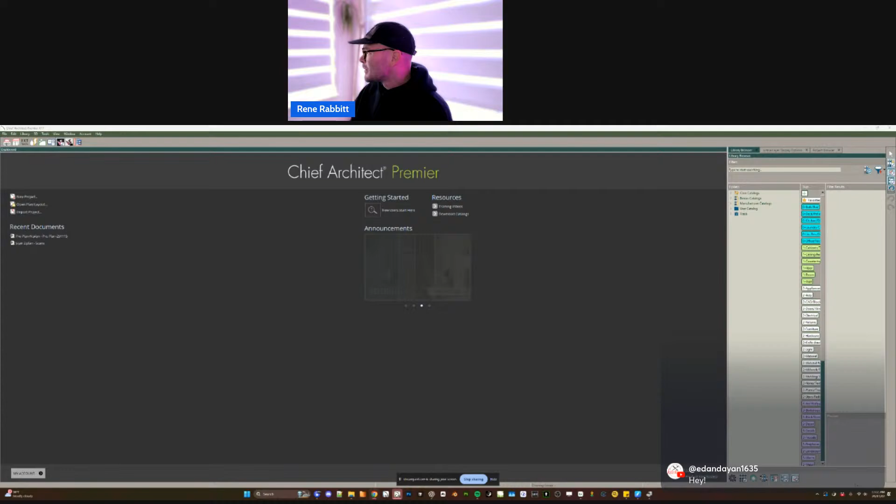Cool, so what can I go over? I'm thinking the first thing that I'll go over is something that I was going to keep and reserve for my membership, my paywall on YouTube, but why not? I don't have anything else to talk about, so let's show you something cool that I would usually reserve for a special audience. So I'm going to get in and just start a little template here.

I'm going to show you something. My templates, the way I build them out - this is, I guess, sort of a shameless plug - but the way I build out my templates, one of the really impactful things you can do in X17 is you can make it so that your plan file, a base plan file, is already being sent to a bunch of different sheet sizes automatically, so that when you start drawing, those different layouts are being populated.

So you can have different layouts for different builders, if you will. You can have different layouts for different scopes if you want to. And it may seem a little bit complex, but all you would need to do to get there is build out a project. And then when you're done with that project, I want you to gut that project. And then you can figure out how to save this as what I would call a template project, keeping in mind that it's not technically a template.

We will never be going to a file menu to access this. We would just be going to our project browser and then copying a project that's already built out, where we have a plan file being sent to multiple different layouts. Now that's in a very advanced realm of figuring that out, but I just wanted to lead you down that path because I just had a training call where a gentleman was discussing, how can I automate?

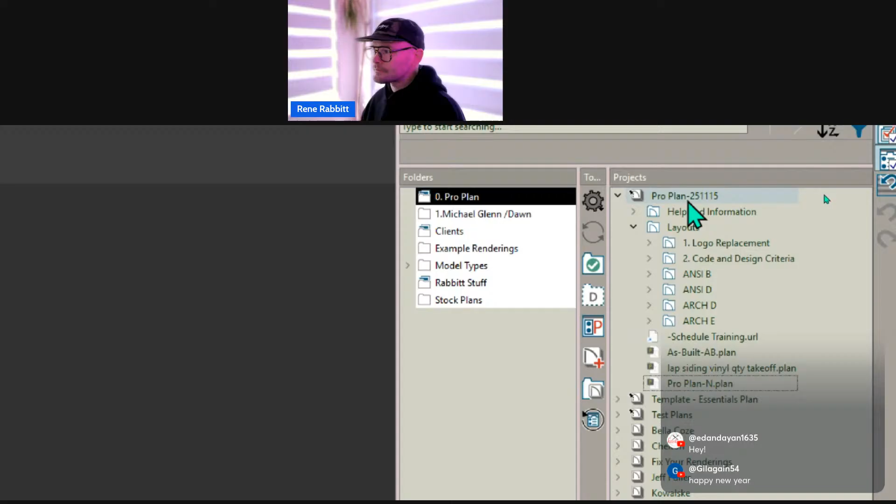Instead of using one layout and a bunch of different complex default sets that you have to flip for every view, he could have just been creating additional cameras, allocated on different layers, and then being sent to different layouts.

This is kind of an example of what I've got going here. I'm going to make a copy of my base template plan because I want to mess around here. What I want to go over today is showing you how to create a parapet builder pretty quickly, so we get a one-click action to create a parapet that might even give us the correct details if we were to pull a cross-section camera. I want to show you how to do that.

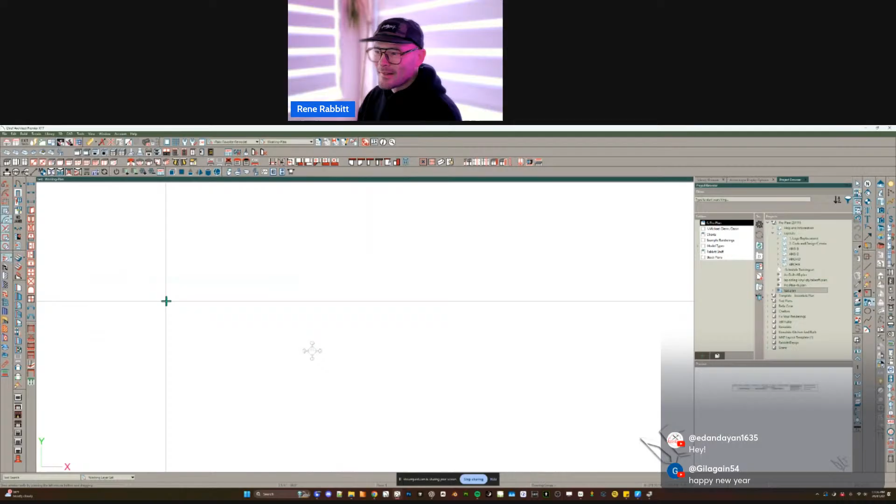I'm just going to start with a really simple four-wall room here. If you're on a Windows machine, I always like to mention this - I think it's such a huge tip - I'm going to use what are called mnemonic keys, and I'll take a second to explain what those are. Unfortunately we don't have this on Mac, and we've never been able to create a workaround on Mac, not to the extent that it works on a PC.

Mnemonic keys are when I tap my Alt key - I want you to see my cursor up here, you see the top menu items. When I tap my Alt key, just tap it, don't move your mouse anymore, hands off your mouse. When you have your hands off your mouse, you tap your Alt key. Notice that all the menu items on a PC are underlined here, with single letter underlined words.

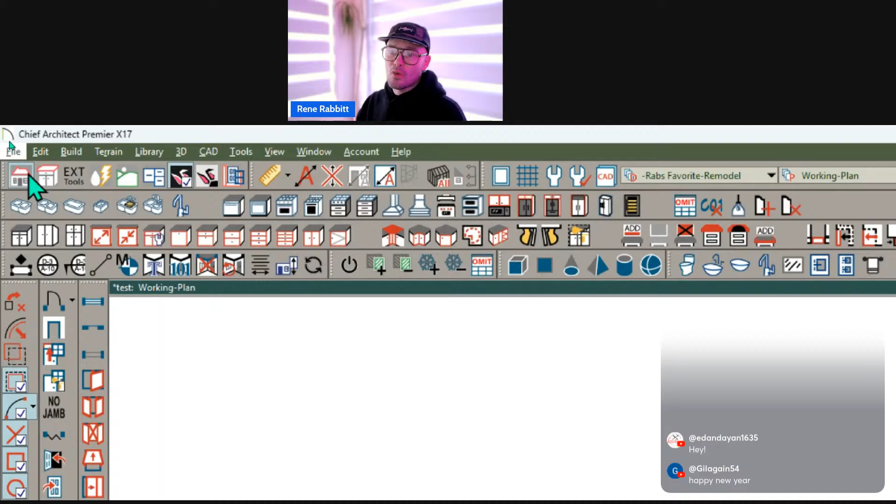So if I want to build a second floor very, very quickly without ever even touching my mouse, I could go Alt B for build, O for floor, and I could just hit enter right now, or I could hit N for build new floor. I'm just going to hit enter, and then if I hit enter twice more, it's just going to copy basically the same configuration from one floor to the next, and now I have a second floor. Isn't that cool?

So the next thing, what do we do here? We want to basically set this room up so that it's got no roof over this room, right? So you can come in here in the structure, say that it's no roof over this room, and we'll press OK.

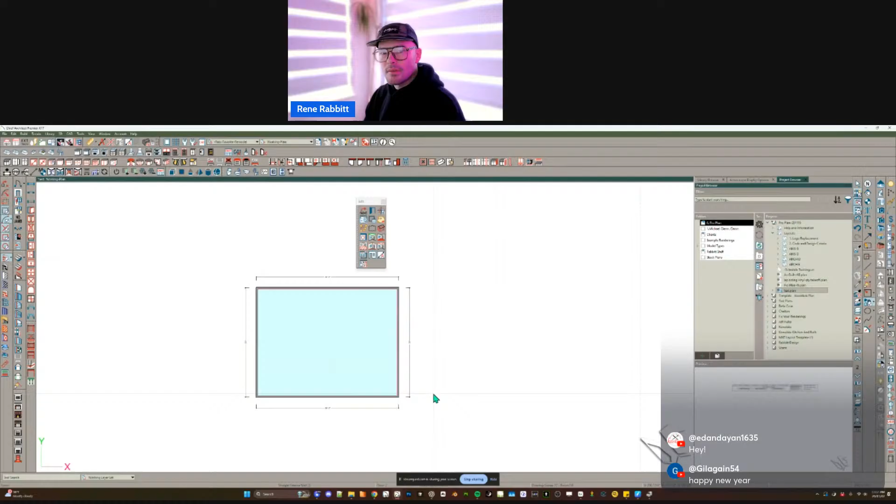And then the next part of this is just setting up these walls. Now I'm going to cheat a little bit - I already have a tool that builds a parapet. I just want to show you how simple this is.

Let me go ahead and pull a perspective overview here, and I'm going to get into my library. But I want to recreate this, and I'm going to probably do a better job this time around. Here we go - I've got a little parapet built here.

So if I just spray this room, look what happens. A couple things happen that might be interesting. One is we've got a cap, and two is that we've got some kind of cant in the base here. And three, you can see that there's some new texture being applied to all the walls and the floor.

This is what's called a style palette, all right? And it's a room style palette. So it's saving some configurations about the room, and then it's applying that as a single click action so that I get to just target a room. We could do this in 3D or we could do this in 2D.

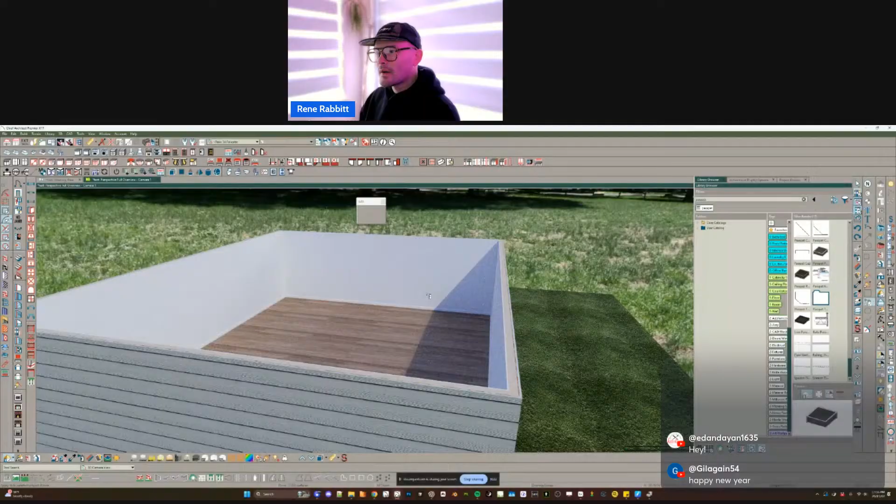The same effect would happen if I just back out one - we can see the previous room, no cap, no wall cap, etc. Now if I go here and I'm on the second floor and I've got that tool active, you can see this is our scope tools right here in our edit menu. My edit menu is floating in the screen. I just get to hover over this - that's my highlight color right there. Hover over this, click, and you're going to see this updates. So it works either in a 2D plan view or it works in a 3D view as well.

So the next thing is I want to make this a little bit more detailed and save this back as a new style palette. What I'm going to do is pull a cross section, backclipped cross section, just so we can see what this is looking like currently. And then I have a parapet detail here that I could work off of.

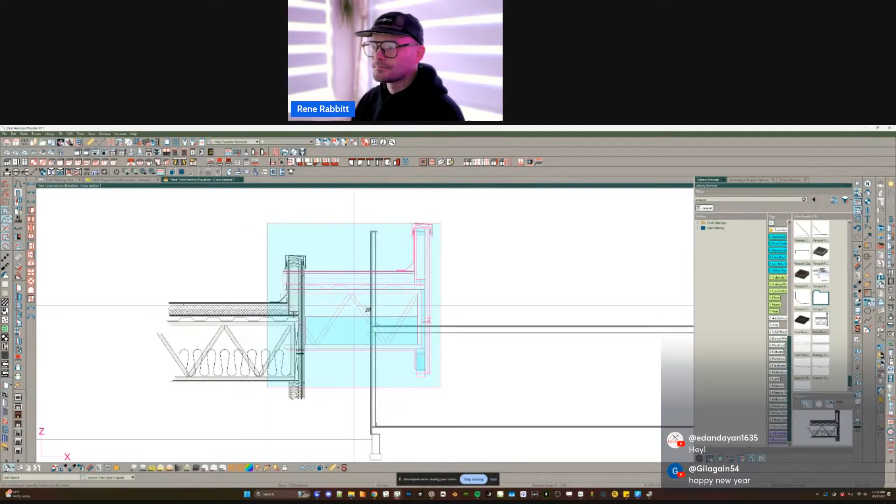Maybe I'll recreate this from these different moldings here, so we can see what was happening. There's just one simple molding in here. We want to make this a little bit more complex. I might even create all of these different moldings and apply them in that style palette tool, and I think we could do that pretty quickly for the most part.

Now, I'm not sure how interesting it is to see me draw all these individually, but given that this is just a CAD block detail, I'm going to make sure that all these are set to a default layer. If you didn't know this, when I unblock, everything in that block is currently selected, so I could conform the layer just by changing it. This minus sign indicates that some of the selected layers are default and some are not. If I click this once, it puts a check mark there, setting it to that CAD default layer, so now I know I'm displaying that in my current layer set.

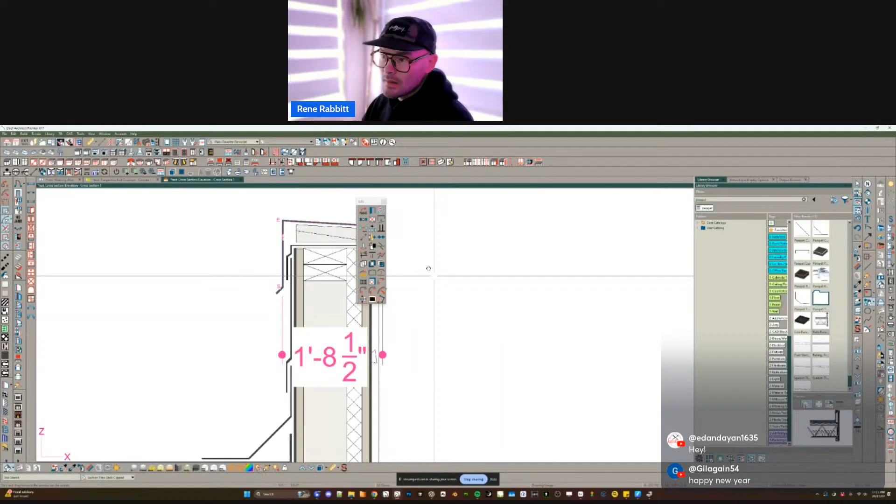Next up, it looks like I already have these moldings created. Now the scale of this is wrong, so I might want to mess around with the scale to try to get it to a uniform scale. I do believe I started drawing this, and I think it might be more interesting for you if I don't sit here and watch me draw a bunch of moldings, but instead power through it and explain the overall goal here.

Let me see here. I think I have a series of moldings in something I called to sort. Let's see if we can find it real quick.

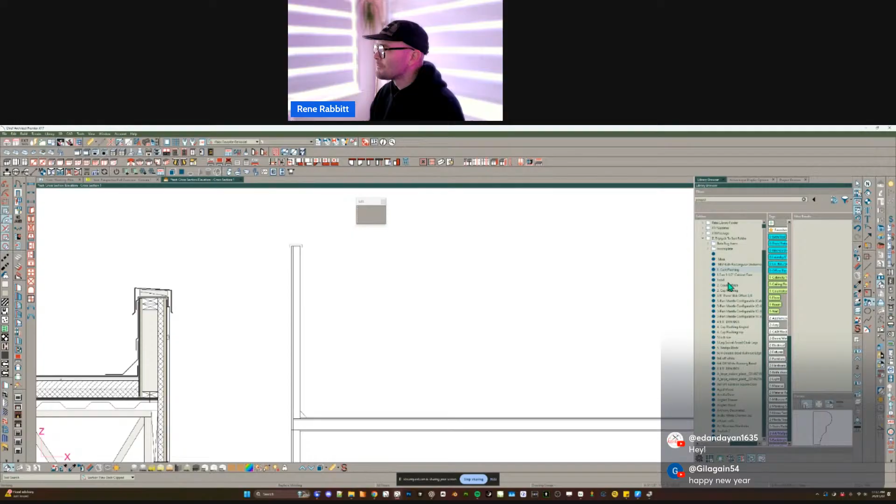So here's what I'm going to do. I have these moldings in my catalog. This would have been a lot easier if I just typed in 'mold.' Let's see what I'm typing here. Molding, and you can limit your search to a specific type.

If you come down here and see this icon, it's saying, hey, I only want to see moldings. Then I can go find my sort section here, and we can see that I started drawing these. I was just prepping for a video I was going to do about this.

Someone said the audio is great.

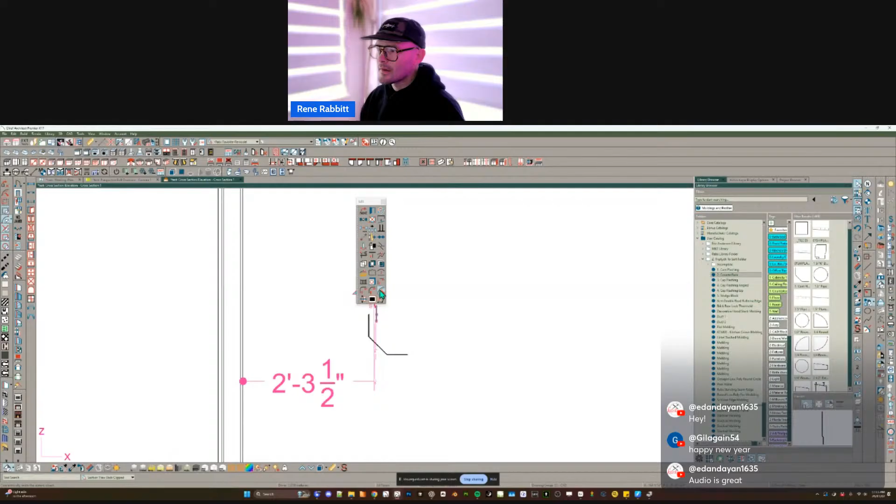Now, if you didn't know this, you can always modify a molding profile by right-clicking in your library and saying place molding profile. This will place this as a CAD block, so we can see what's happening. So there's a cant flashing. I'm going to do the same thing with this counter flash just to see what this is looking like. We can see this is going to line kind of like this.

Sure, right, here's our cap flashing, that's going to go at the top. Again, if I didn't select place molding, it thinks I'm just trying to draw a molding right now. It would draw a molding line if there was a snappable point it could work from, which is a little more difficult in a cross-section view.

And so here we go, place molding profile. Just click and place, cap flashing angle. Let's place that molding profile. This one goes over the top of the first one.

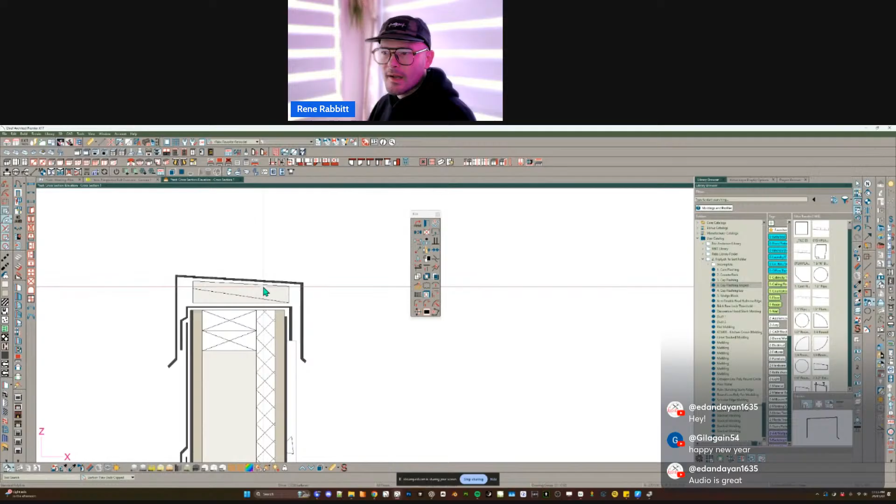Now here's the real big trick I was going to implement for this particular detail. There's no way to get a 2x4 that's been chamfered like this, cut down like this and angled like this. So I thought maybe it would be interesting if I made my own molding profile to just look like that 2x4, because the only time we're going to see it is in a cross-section view.

So what happens if I just drew this out? Let's see how I drew this real quick. That's simple enough—this is a disconnected molding profile.

You see there's a little gap here, which doesn't bother me all that much. Once we turn line weights on, that just looks like a cut down 2x4. So that works pretty well.

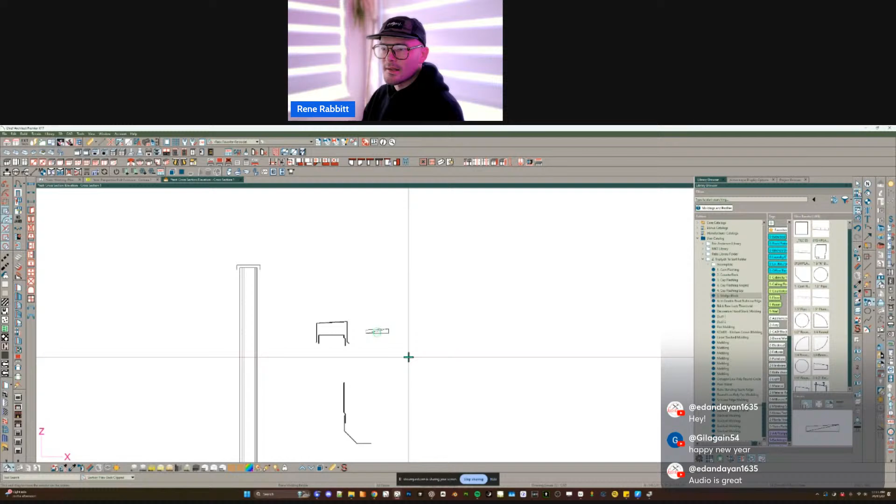So it looks like I have all these drawn. What's the next step? Now we got to figure out how we can align all this. There's some complications and some tricks to this that can be a little bit challenging. So let me get into this room specification.

I'm going to select the room, open it up, and get into the moldings section here. We can see we've got some moldings in here that we're going to replace. I'm doing this on the fly, this is not practice, so I'm going to screw up a little bit probably.

All right, so now I can get into where I've got these flashings. Should be easy enough to just start by just loading these in, I would say. And it's going to pick up, it's automatically understood that was some kind of base molding.

It's not going to understand that this is a base molding. It thinks it's a crown molding. That's okay, we're just going to set this to base molding. You just do that in the type section.

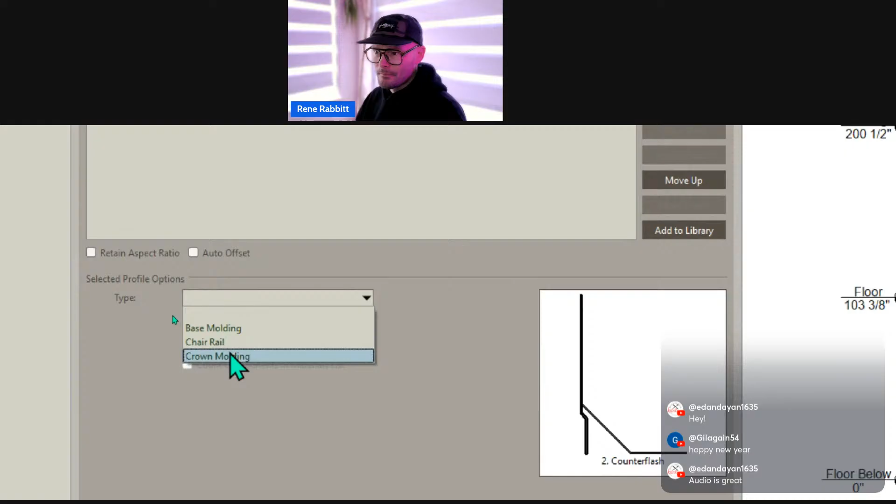I want you to notice this, base molding, okay? If we just left it blank, who knows? If you set it to crown, what happens?

When we set it to crown, it's going to place a check mark in here to top, all right? And so when we get a preview of this, we're going to see that, here we go. This is how it's placing, to top. If we unchecked to top, look what happens. It's referencing the bottom, okay? It's still being designated as a crown molding, but it changes kind of its origin point, all right?

So this one actually is going to be a base molding, and then we're going to change some offset. Now, another thing happens when you change the type classification. I want you to see this.

Notice our preview, it's just showing this molding. That's because no other moldings are classified as crown right now, okay? Now, if I were to change this back to base molding, notice something. We see our cant flashing here. Why is that? These are both classified as base moldings. So this is a way that you can see how these are interacting with one another, all right?

And so then if I change some kind of vertical offset for this, let's just say I'm doing a vertical offset of maybe about 6 inches or something. I didn't take any dimensions here, but look at that. Now we can see how this is working together.

Pretty cool, all right. Now, this is not going to be a perfect flashing setup for one very specific reason. We aren't using what are called 3D moldings, okay? We're not using a molding profile that was generated from a 3D symbol. There is a benefit to doing that for this particular molding.

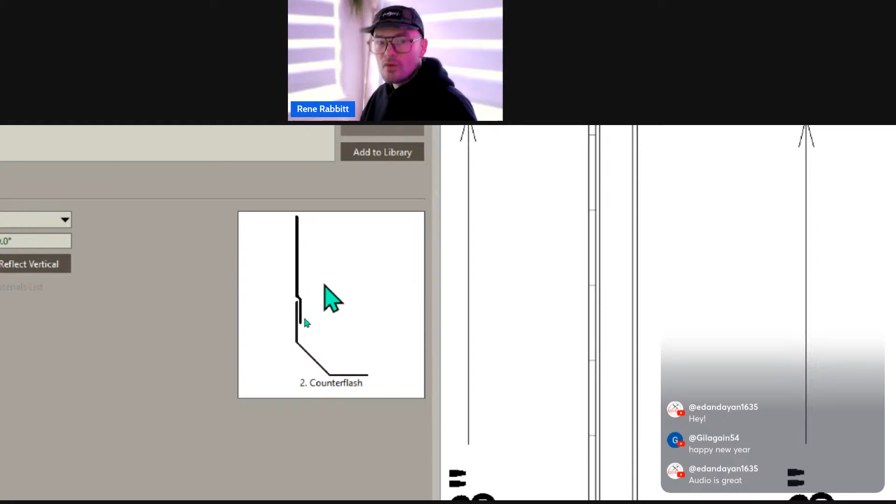When you draw a 2D CAD symbol and convert that to a molding, it cannot be stretched in any axis, separate from just being uniformly stretched just by resizing it, okay? So we can't make this upper portion here be taller without it just being skewed in every which direction uniformly, okay?

If instead I were to have converted this to a solid that was maybe 12 inches long, and then from there converted it to a molding, then I get the option to put in a stretch plane. And if we know about symbols and how stretch planes work, we know that we could put a stretch plane 4 inches up in the Z here.

And what that would do is it would create a uniform cutting plane so that if we resize the symbol's height, it would stretch by just duplicating the geometry around where that stretch plane created a cut line, okay? And so that would make it so that we could change the height of this based on the height of our parapet wall. Very cool. Maybe if we've got some time, I could show how that all works.

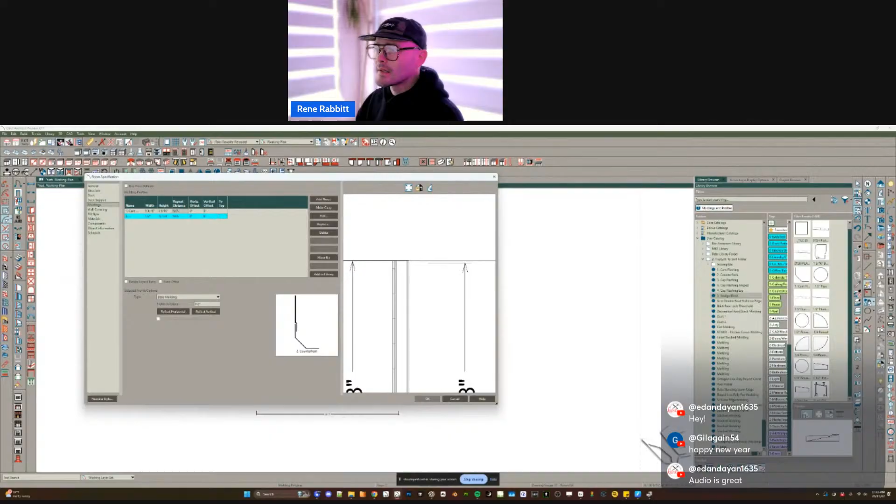All right, so let's get into that next molding here. And notice I numbered them. That was just to make it very easy for me to go through here one by one and just put these in place. You can obviously rename them after the fact, and that would be just fine.

So here's my cap flashing. Let me put this in. And so this one is going to be crowned, so I'm going to leave that the way it is right now. We are going to need some kind of a negative offset, right? But I'm going to leave this for right now, and we'll get to why in just a minute.

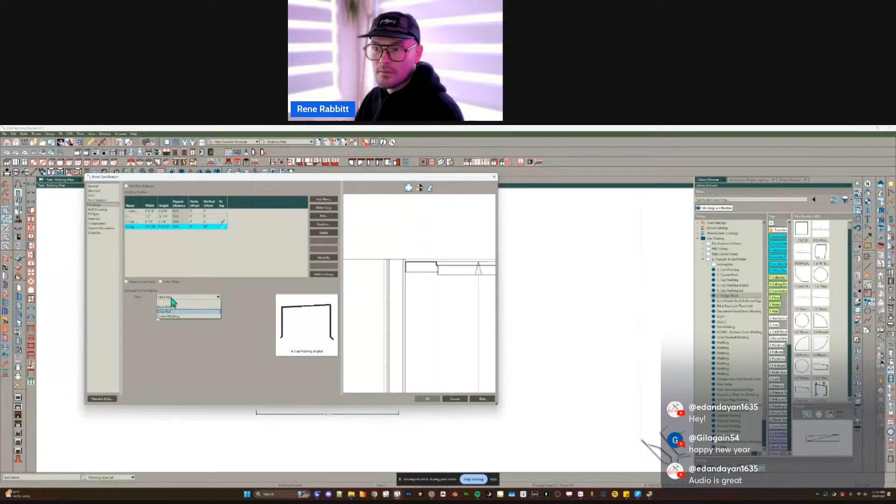Let me go to the next one, just loading these up, and I'm going to use the angle. Notice I have one that's straight and one that's angled, so I'm going to use the one that's angled. And this thinks it's a chair rail because we've already got a crown molding.

I want to make sure it's set to crown mold. Now we can see how it's orienting itself compared to that other cap flashing there. And last, definitely not least, my wedge block is also going to be a crown molding.

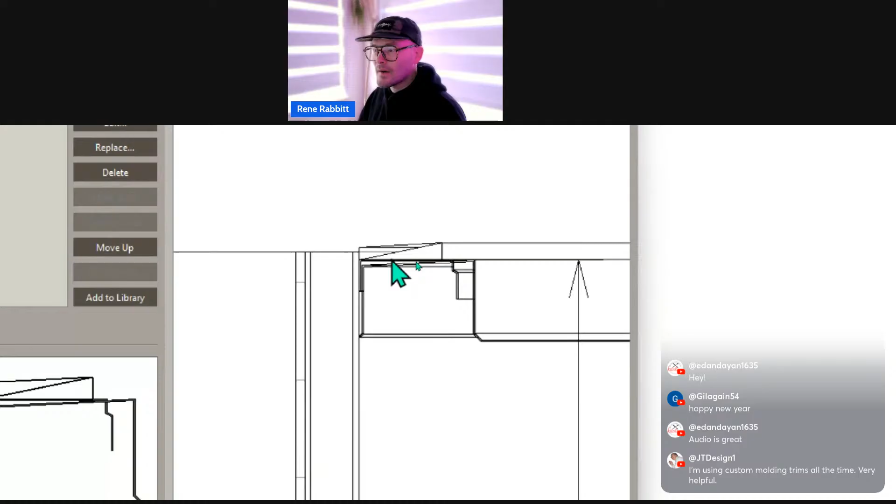Now, how do we get these caps up above my wall assembly, right, where they need to be, in particular that wedge block? So I can set this—I unchecked that 'to top' setting, and we can see that moved and changed its reference point, all right? But I still need this to go up a little ways because it needs to sit up above my wall here.

Right now it's sitting just below my wall. It needs to be up above, especially if I want that cross-section cut to be perfect. So here's what I want to do.

I want to create a vertical offset, right? So I'm going to say, hey, I want this 3 inches vertical offset. Well, look at this—Chief Architect decided at some point that they're going to flip what the offset is based on, depending on what we're working with.

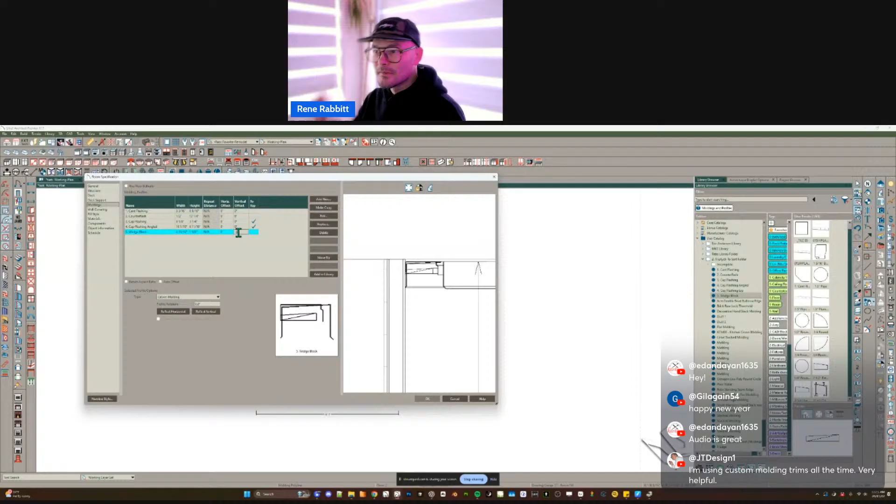I still find this to be very, very confusing. It's not quite intuitive. I would love it if Chief changed it so that no matter what, positive is in one direction, negative is in another. So we just have to keep in mind that when we're doing something considered a crown molding and you put a positive vertical offset, that actually moves in the negative Z delta.

So if I want to go positive Z delta, I put -3. I want you to notice something: it moved up here in our preview, but it did not move up here in our preview in the room. That's very important to note. Why is that? Well, according to Chief, we can't move any given molding profile past the ceiling plane height—it won't move above that ceiling plane height, and it's based on the total molding size.

But there is a trick about this—we can make this work. So all I want to do is concentrate on this preview right here; this is what's important to me, okay? You'll see how this works out in just a second.

So I'm going to go -1, actually. And then I just want this to go just above this cap molding. That's what's important right now, okay?

I keep losing my mouse because—there we go—I'm zooming. So let's just go negative maybe half an inch. And this is just going to be a guess and check—quarter inch. That looks pretty good for me for what I want if I pull a cross-section camera and I'm looking at details, ignoring this other one.

In fact, we could put a big offset for that angled cap flashing just so we can see it. There we go—so here's what's happening so far, right?

Now that top cap flashing needs some kind of horizontal offset, just a little bit here. So let's go -1 for there as well. That's looking a little bit better. And then maybe 2—that looks pretty dang good. Maybe I want the spacing to be a little bit more perfect here, right?

You'll be playing around with these distances, certainly. Or, you could bring up a CAD detail and dimension it all out so that you have some kind of reference. That probably would have been a smart thing for me to do.

So let's see, my horizontal offset—I'm going to go -7/8 instead. I'm going to center that up a little bit more, and I'm going to go -2 and 1/8. Oops, yeah, that worked out. So this looks pretty good.

Now, it looks terrible over here in our preview, and that's true. If we were to take a look at this in 3D, this is what it would look like—not this, okay? But the trick is this.

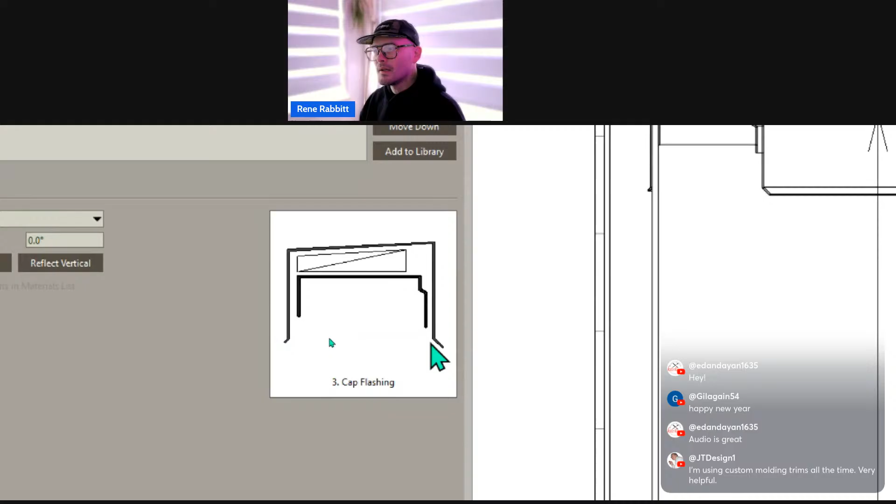Because we have this really tall profile, and we know we can reference to top, or uncheck 'to top,' that means we can offset this based on the bottom of this profile. Meaning this whole assembly, if we were to make it a stacked molding, would reference based on the stacked molding's overall height, which then means we can shift this whole thing because we've got this larger profile. Let me show you how this works.

We're going to see what happens in the preview once this all pans out. Okay, so the one thing I kind of screwed up on here is this cap flashing. Both of these, I should just reference to top. It's going to make it easier for me to assemble this whole thing, I think. Let's try it without.

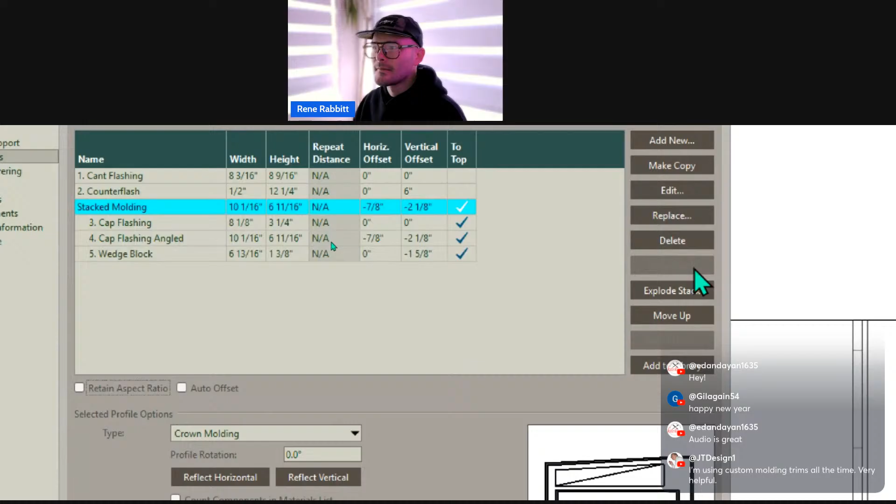Let's try it with. So I'm going to shift select all of these moldings. Select the first one, shift select the last one, right? So shift select all of these. And over on the right-hand side, I get this make stack option. So we can see what happened here. Now we've got this stacked molding, and we've got those different moldings associated with it in that stack.

Now check out what we get to do based on this stack. I want to uncheck to top on the stacked molding, I'm not going to mess with any of these settings if I did this right. So uncheck to top here. It did some kind of adjustment. Now I get to move the entire stack as a whole. Notice we got that wedge up above our wall line, which is perfect. That's exactly what we wanted, okay?

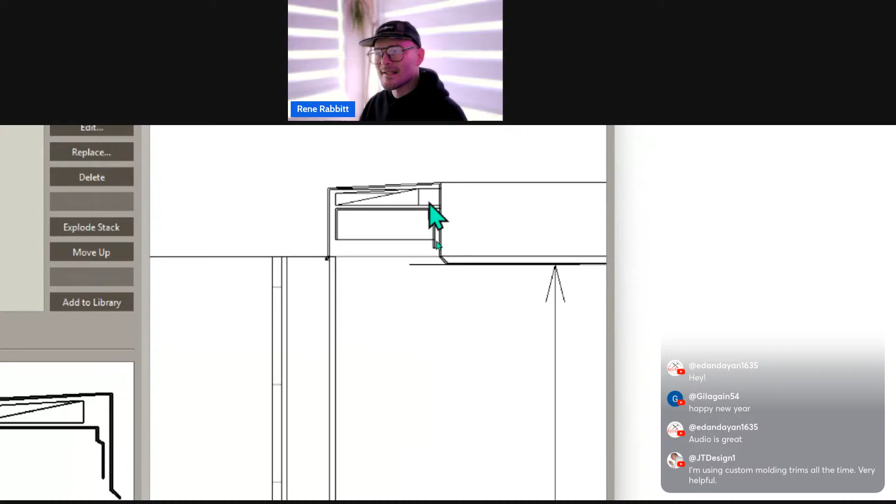Now we're kind of seeing a mitered end here, which is why we see a little bit of a return there. That makes sense because the wall is not blocking this section because we haven't changed our vertical offset yet, okay? I think that's pretty cool how they do that.

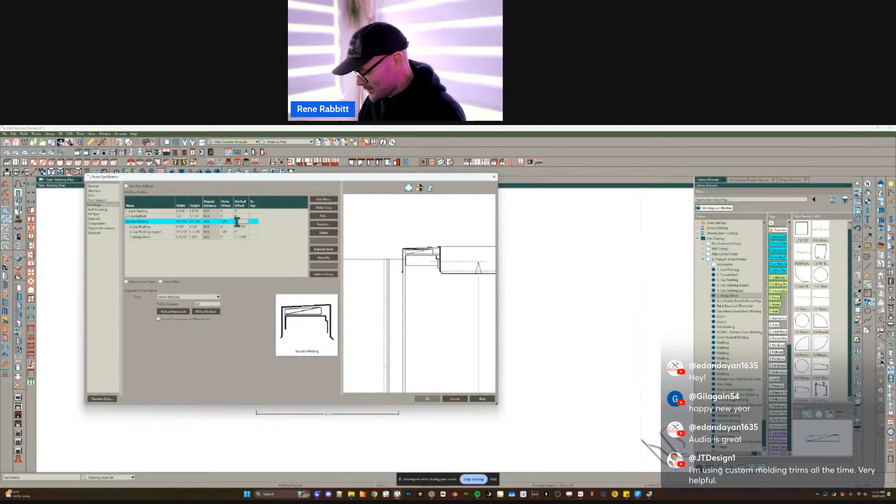All right, now let's mess around with our vertical offset. Let's set this back to a base level 0, all right? I'm looking at the preview here. Let's see what happens. Yeah, so I want to drop this down. So I'm putting in a positive value to go a negative direction. See how that gets confusing, right? Let's go bug our developers about that one.

So I'm just doing a little guess and check here. 3.5 inches looks about right. And then I've got to do some kind of negative offset in the X, so we're going to go something like -6, maybe -7. And I probably want to change this, obviously these moldings were set up for a different wall type, a thicker wall type. So I'm going to keep messing around with this offset, assuming we've got a thicker wall type. There we go, and that's about as good of a preview as I can put together there.

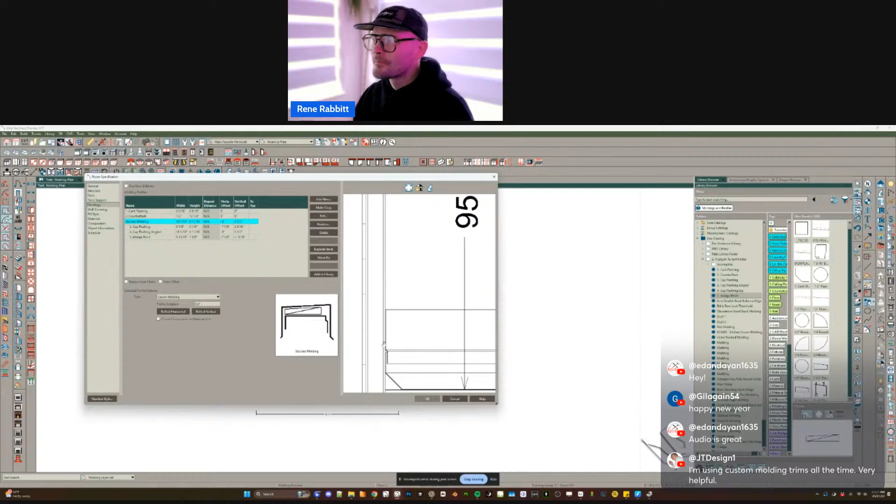All right, so if we take a look at this, we've got that cant wedge right here. I could have put some additional flashing to kind of lap over at the bottom here if we wanted to. Up to you. Yeah, this is looking pretty good. Let me press OK and see where we're at.

Let's go take a little look at this. Isn't that cool? So there's our cant, and there's that little stepped flashing that goes over the top of it. Here's our wedge at the top, right? And we can see inside here. Let's go take a look at our cross-section view now. Look at that, isn't that cool?

So when we pull this cross-section view, we do a little build all framing, we do a little auto detail, and throw some CAD stuff on top. That looks pretty dang sharp for the most part. You would do a lot less detailing, especially if I had the correct wall type in here.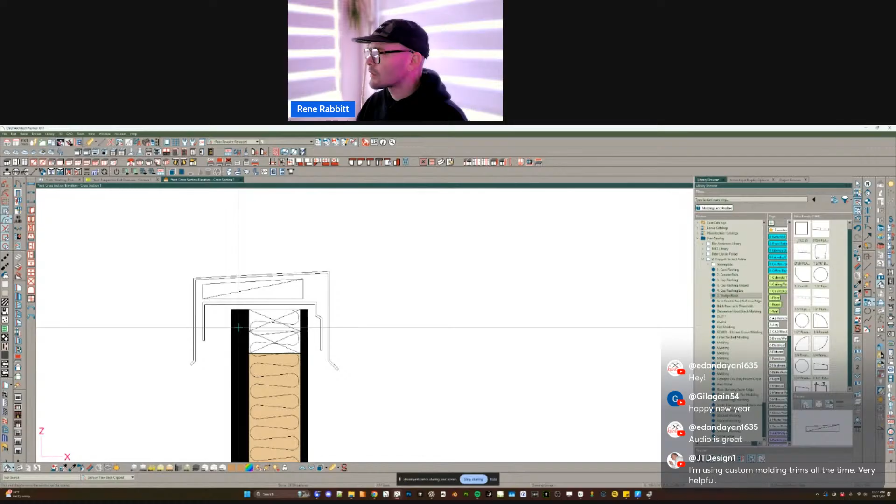So what's our next step? Well, we want to get in here and get the materials that we want built out, right? Now I'm going to build a second building here off to the right, and this is just because I want to steal a particular material that I don't know where it is in my library. Bear with me.

And let me pause for a second. Let's see what we got going on with the comments. I'm using custom molding trims all the time - very helpful. Okay, yeah, I think we might have enough time to go over what I was referring to when I was talking about creating a 3D molding.

All right, and then let's see, my parapet painter that's got a really cool texture on it here. Better texture than this one is one I created. You guys probably know by now I make my own textures. This was just created from some kind of pebble that was scaled down, so it's got a really good 3D look. Notice this is another example of a parapet wall.

Now this is one that I need to fix because you can see here I'm using a 3D molding as the cap and it's not mitering correctly at the corners. So that means you have to go manually place some things. But very cool, notice I just one click and it applied all these effects. So I'm going to go ahead and paint in this room. In fact, we'll just change it to a room scope.

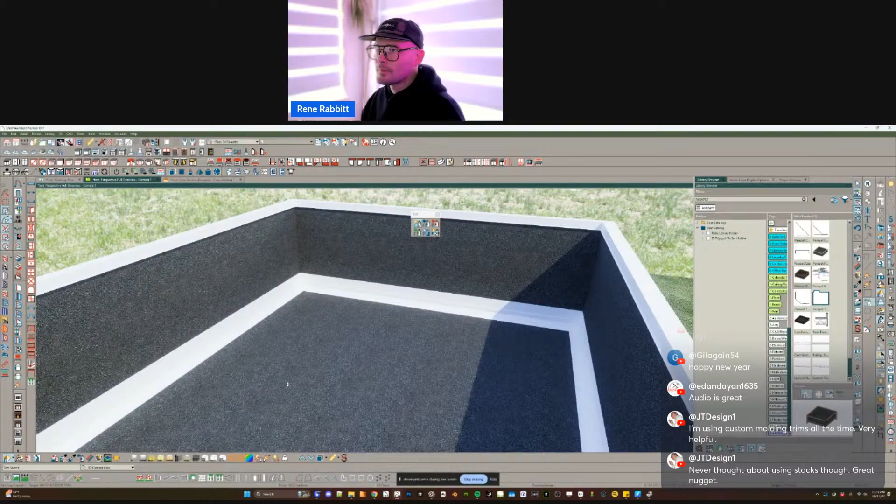And same thing, I'm going to paint my base molding here, that little wedge flashing. Although I might be incorrect, this would look a little different than this. We might actually have, oh no, that's all right, they would be rolling the asphalt over the top of that. And maybe it would have been nice to kind of take the hard edges out of that flashing that overlaps our cant. And then I've got just like a black stainless steel material that I would use for everything else.

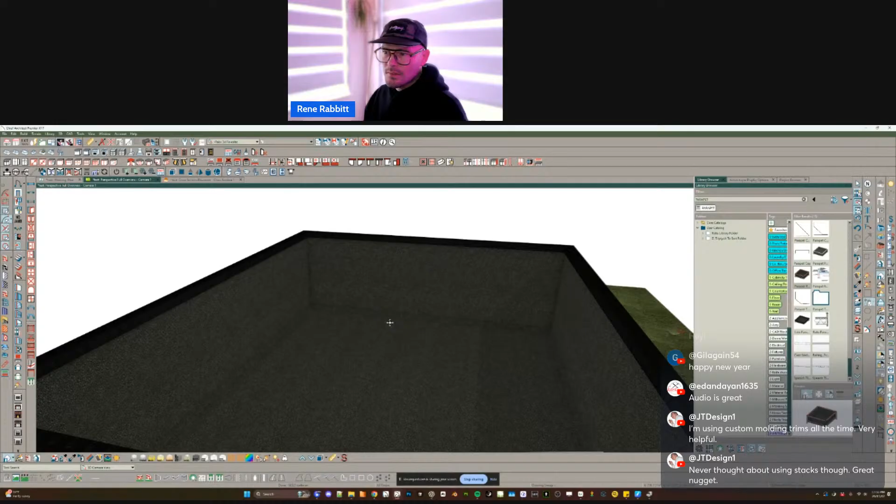Now, if you can't get in here and see these other moldings, I just say get in here real tight with a little vector view or whatever, and get into a cut so that you can get into there and paint those moldings. Otherwise, you just got to open up the room, get to the materials tab, and change your materials that way.

So this is looking pretty good the way I've got it. I'm liking what I'm seeing. So the next part is just building this into a room style palette. All right, so how do we do that?

It's pretty simple, actually. You're just going to select your room, and then in your edit toolbar, which is usually at the bottom of your screen, we have this icon here. So I'm going to use this Add Object to Style Palette.

Now I teach this in my classes because there are a few little funny things you can do with this. If you were to say make some adjustments to this, which we are going to do, and so we just want to update a base style palette, something we've already created, then you would say add to existing. Now you're going to notice when I hit create new, it gives us the option to transfer certain settings, very similar to how we might use the object eyedropper tool.

And so instead of using the object eyedropper tool, this basically is that one-click action that gets to save to our library, whereas we can't use an object painter from a library. So this is what makes this tool so powerful.

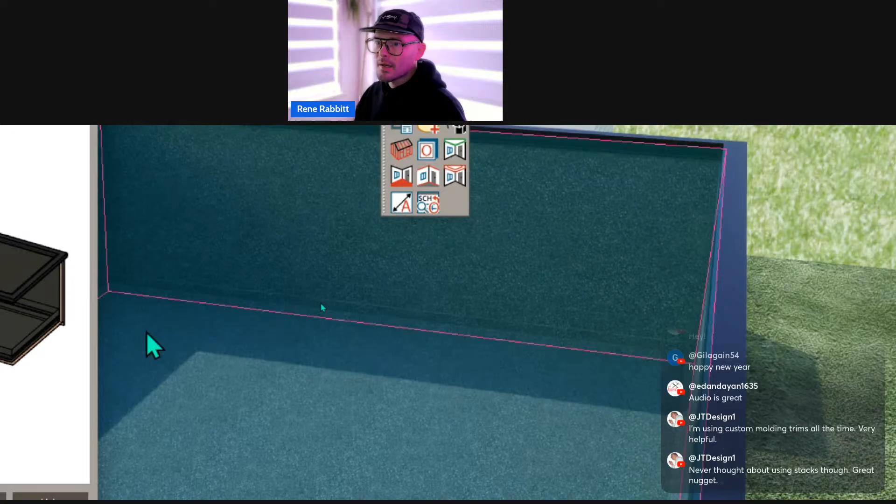So I'm going to create a new one this time around, and it's going to bring up this dialog box. In this dialog box, we have our set properties. Now, it might not seem obvious, but you can just come in here and click on this, and it will open the object, for instance. So I can make edits to my style palette's room straight away from the style palette dialog box.

And so keep in mind, I'm editing the style palette right now. I'm not editing the room that's in my plan. All right, I'm going to hit cancel. I'm actually going to come in here and say set properties. And this is where we can set all the specific properties for this particular room.

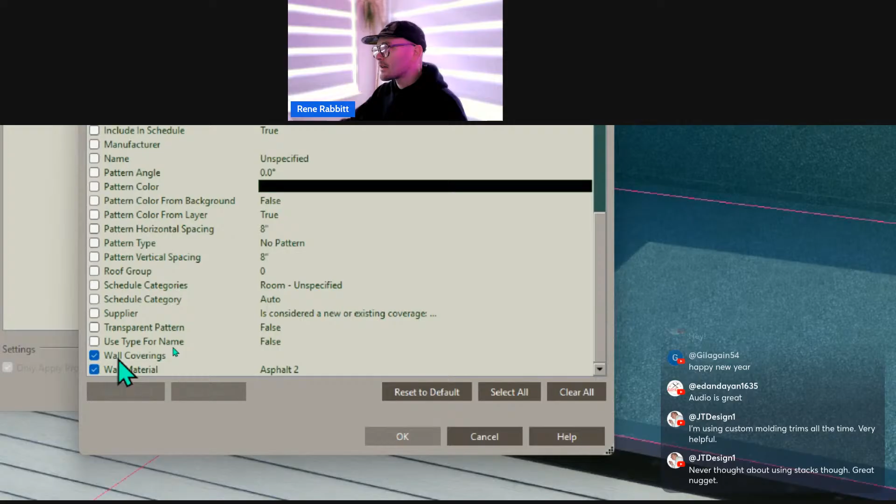Now, a couple of ones that are really important are wall coverings. Chief just happens to know that this is probably what you're saving the style palette for in the first place, because that's what they built the style palette tool to do, really, is to change the visual display of something. But there's a number of other settings you can get from here as well.

So wall coverings, wall material, that's really important to me. Has roof, okay, that's actually really important to me, as well as has ceiling. I want to make sure that this thing doesn't have a roof, doesn't have a ceiling when I spray it, so I don't even have to worry about taking the roof or the ceiling off of something.

And then let's see, anything else here? Crown moldings, we definitely need that. Chair rail moldings, we definitely need that. You could keep the floor structure if you're trying to create a parapet where you're always using the same type of floor structure. This is the opportunity to do that.

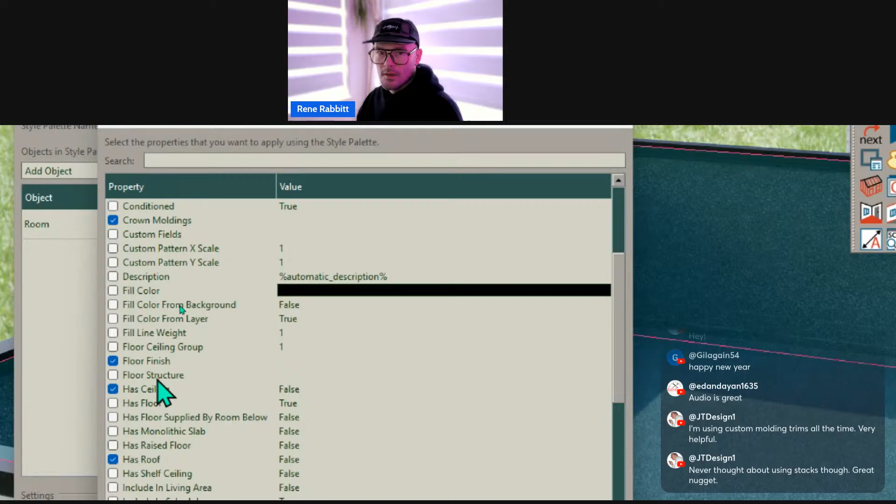So if you wanted to set this up for your 14-inch TGIs, or you want a 24-inch floor truss, set that up in the room, right? We could actually go back to the room and set that up. And then we're going to save that to the style palette so that when we spray this, it changes the floor structure separate from whatever the default floor structure is for your project.

Now, if your parapet is, you want to just—I would suggest that you don't change the floor structure if you're building a building where your default floor structure is already correct, because we don't want to override those settings and possibly screw them up. So keep that in mind if you're going to utilize floor structure.

And then I've got crown moldings, chair moldings, ceiling finish, base moldings, etc. If I want to, I could do a little search for material and just see what comes up in terms of found properties. We didn't get a lot from this—it's basically just the wall material.

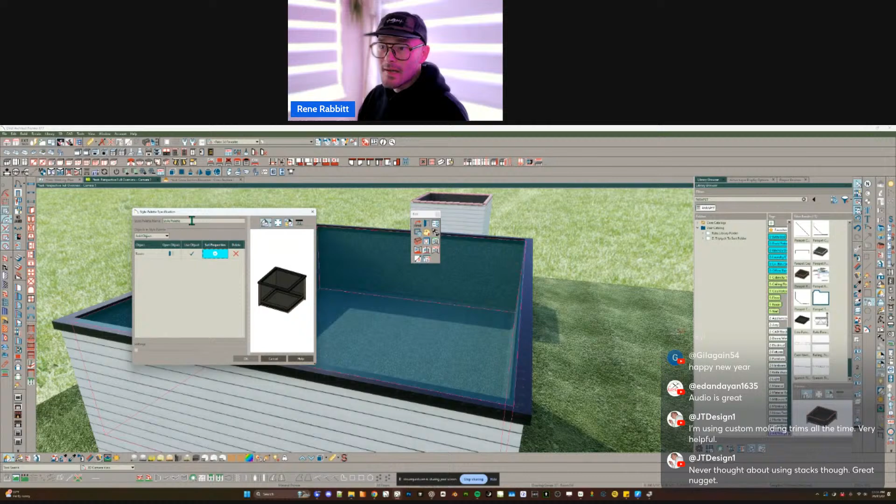It inherently will bring forward the molding material, even though it doesn't say that, it will. So let me just press OK. Now I have this tool, and we want to name it—out of the box it's just going to say style palette. So this is my parapet painter, we'll call it number 2. Oh look at that, I had caps on.

Let me press OK, and now I should be able to take this. It's now selected in my library—when you add it to the library, it's already selected, it's the active tool basically. So I can roll over here and spray this room. And there we go, it's been updated. Isn't that cool? Quick and easy.

Now we have this thing that can be detailed in cross-section views very easily, and it looks correct.

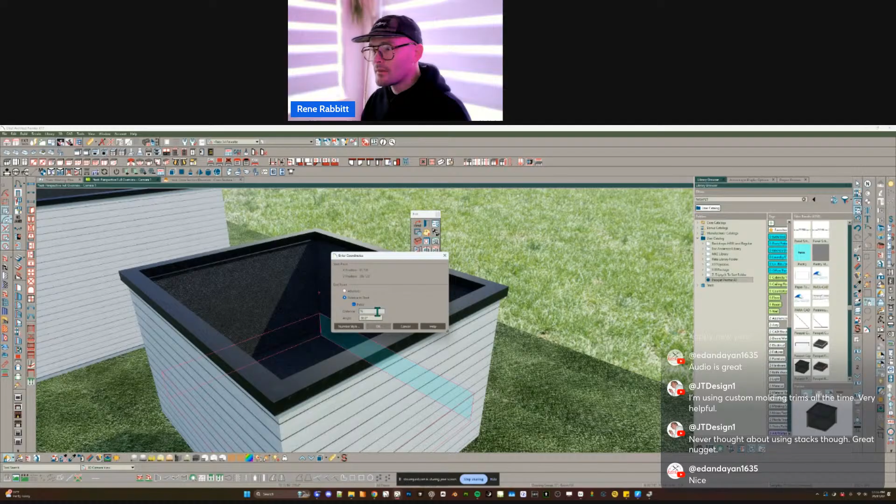Maybe a last little trick here: selecting a wall in 3D and then hitting Tab or Enter key gets you a new set of edit handles. You're now editing the room height. So if I knew what the existing room height was here, I could just drag this down by a very specific amount while dragging, hit Tab or Enter again. Polar is checked right now, and I'm going to change the overall height of this room to 76 inches.

Really, really simple for me to get to a parapet that I might actually be building, right? So this looks pretty good. Now we've got some time—please let me know if you've got some comments or questions about this process so far.

The next thing I want to do is get back to this cross-section view, and I'm going to do what I said I'd try to do, which is mess around with this guy right here. So I'm just going to make a copy of him—I don't know why, this is force of habit. And then in our edit toolbar, I'm going to convert this polyline to a 3D solid.

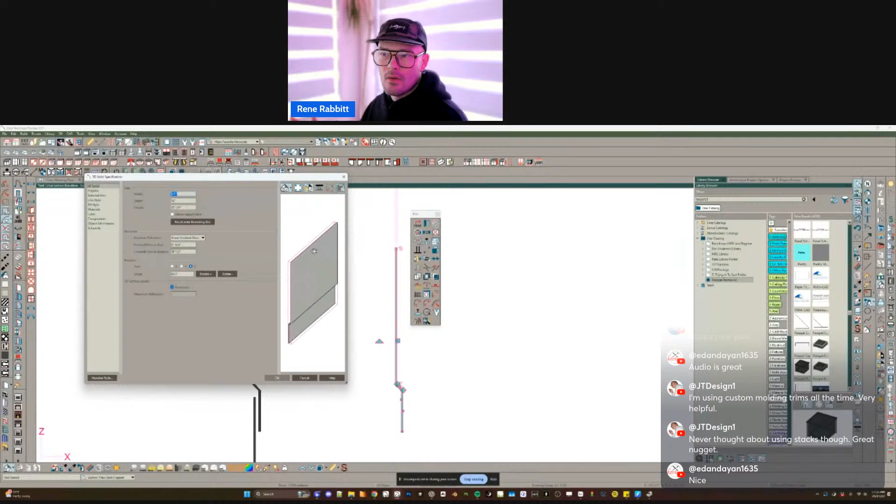Now 12-inch depths, totally fine. This is exactly what I needed. This process is going to be as simple as this. I'm going to press OK, and now I'm going to convert the selected to symbol. We need it to be a molding class.

So if you didn't know this, we can convert a 3D object to a molding. We can convert multiple 3D objects to one single molding. Why is that important to note? That means multiple objects can have different material classifications with them. We could have exploded this 3D solid, making it so that we could paint every surface of the solid a different color, and then selected all that and created that molding.

So this gives us the opportunity to have other UV mapped coordinates on one single molding profile. You got to think about that a little bit to understand the full scope of what you can do with that. For instance, I created a sill profile, which is a Rowlock brick with a threshold—that's one molding, so it can get applied as a sill.

The other thing we need to note about converting a 3D object to a molding is we get the parameters of setting some kind of X, Y, Z offset, so that the molding, even though it's placed on a particular molding line, could be offset from that line—meaning we can get a lot of dynamic symbols pushed in automatically into your windows and doors that have specific offsets to take care of unique architectural features. This is getting into the weeds, but I just wanted you to rewatch that, write it down maybe, and get an idea of what you can do with this. It's a very powerful method, turning some kind of 3D object into a molding profile.

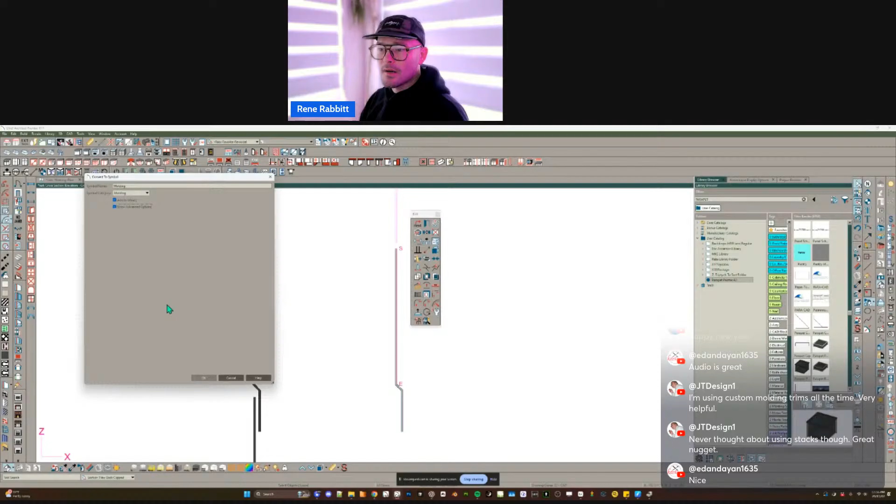And you can see what's going on here. It's repeating itself, but not in the way we want it to, right? That looks pretty messed up.

So we are in the 3D panel. Please note that in this convert to symbol dialog box, it looks very different from other symbol categories, your fixture symbol category, your furniture symbol category, your electrical symbol category. Now the electrical symbol category obviously looks a lot different from other categories as well, because we have the opportunity to specify something as a light. But this one's very different, because we're starting with the 3D panel right off the gate.

So we can see here, we want to do a rotation in the Z-axis. Why the Z-axis? Because if we take a look in the preview over here, we can see that this is our Z leg, so positive. We're always going to mention this in video because I feel like this is a hard thing for people to learn at first. So all these legs represent a positive direction, okay?

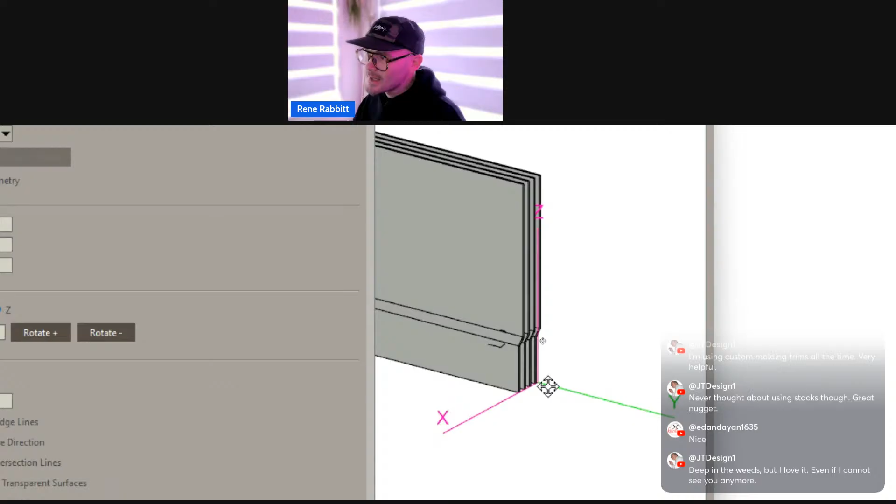Now, if I want to rotate something, I like to think of it as like a trapeze artist, right? So in this case, I want to rotate this as if my trapeze artist was flipping around this Z pole right here. That's his pole, and he's just going to be flipping around like this. All right, so I'm going to rotate this about the Z.

So I leave it at 90 degrees. That's fine because you can click rotate a bunch of times. But watch what happens. The way this repeats itself right now, watch what happens when I rotate it 90 degrees. Look, now it's repeating itself in the way that I really want it to, okay? Isn't that funny? Rotate this way, it's stacking them up like a bunch of plates. Rotate this way, and it's stacking them end to end. That's perfect. Now, here's where the magic of this particular symbol is going to happen if I do this correctly.

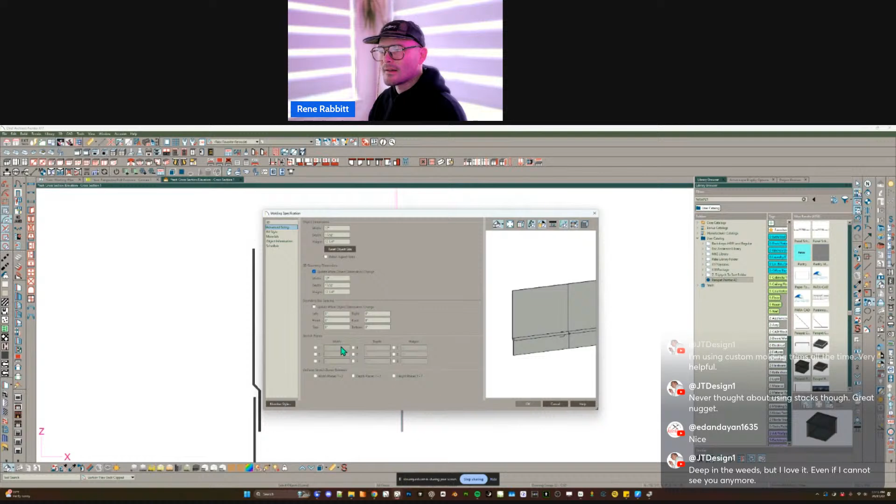I do want to mention that I've gotten so far into these kind of symbol modifications that I know that there is a known glitch when you get too far into the advanced sizing panel. I don't think we're going to run into it, though, for what we're going to do here. But sometimes if we've got a bounding box spacing update and a stretch plane, there's a glitch that is extremely complicated for them to work out, and they've been working on it for 3 years.

All right, so I'm going to put in the stretch planes section, okay, I'm going to put in a height stretch plane. And so we can see here, just by checking this box, we see over here, kind of over in our preview, if I can get in tight here, that's indicating our stretch plane. That's our cutting plane, okay? So I actually need this to move up like 4 inches or something like that.

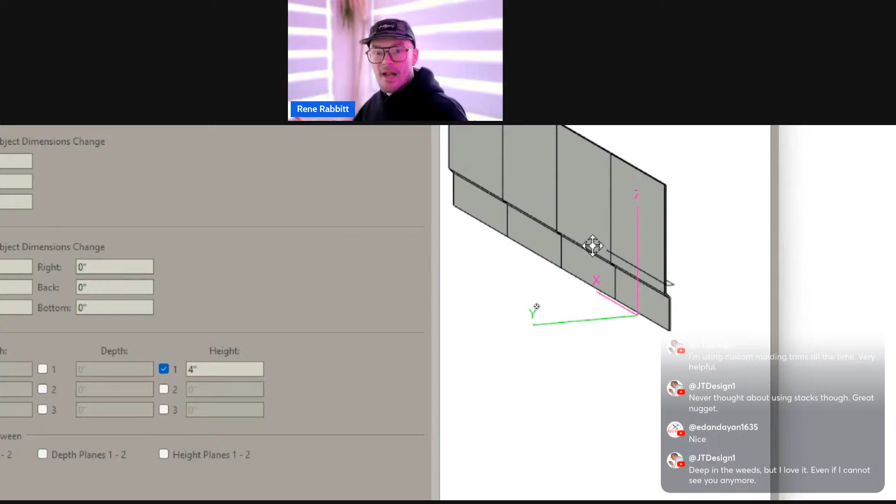What does this mean now? That means where that stretch plane is, it's just like a slice. It's going to take that slice, just like we would do a cross-section cut. It's going to take that slice, and wherever the geometry meets at that slice, it will reproduce that same geometry. It's basically like applying a 2D CAD molding. That 2D CAD molding is exactly the way it works in Chief Architect, we're taking that as a slice and we're repeating that geometry over and over and over again.

Right, so that's all we're doing with this stretch plane is we're cutting through that section, and that means when we change the height of this symbol, it will just continue to reproduce at that cut line, okay? The same geometry of that slice. It's really hard to explain that. Maybe I should chat GPT it one of these times.

So now that I've got this all set up, the next thing I want to do is I want to get to the materials tab, and where it says concrete, I might want to go select that material that I really want this to be. Or usually something that's prudent in this scenario is that you get into your material defaults and you set this up to be your material defaults. So like I could have this automatically be set to whatever the fascia color is for this project, which I'll do for this, that's fine.

And then this is just me being a funny little stickler. If you single click in here, you can even name what this is. So you might call it body or molding or whatever. Not really that important, but I don't know, it's an old habit of mine.

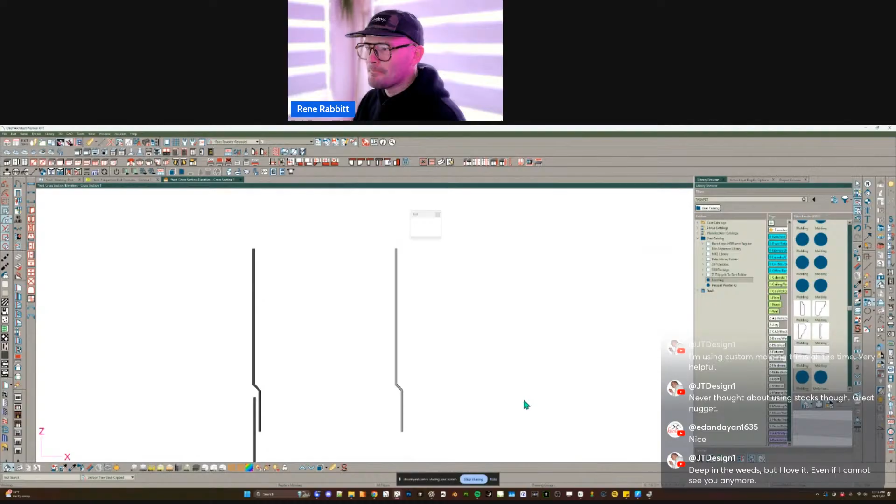Keeps everything really uniform. Okay, now that I have this in place, can I just hover over this and replace it? No, it does not toggle replacement mode because we're in a back-clipped cross-section view. If we were to go edit the active view because we're being stubborn and we don't feel like getting out of this view, and I uncheck back clip, now it might be that I could take that molding and hover over and click and replace.

Okay, so now what's interesting or not interesting about this molding? Let's see if it works the way I hoped. I'm going to select this room and open it up. Actually, I'm selecting the wall, I need to tab once. Now I'm selecting the room. I can open the room from this elevation without it being back clipped.

And so we can see here, here's that molding. Now I should have renamed it something different than that, but there's that molding. Do I get to change its height without affecting its other geometry? Notice that 3D moldings have a very different preview - we no longer see them as they relate to another molding.

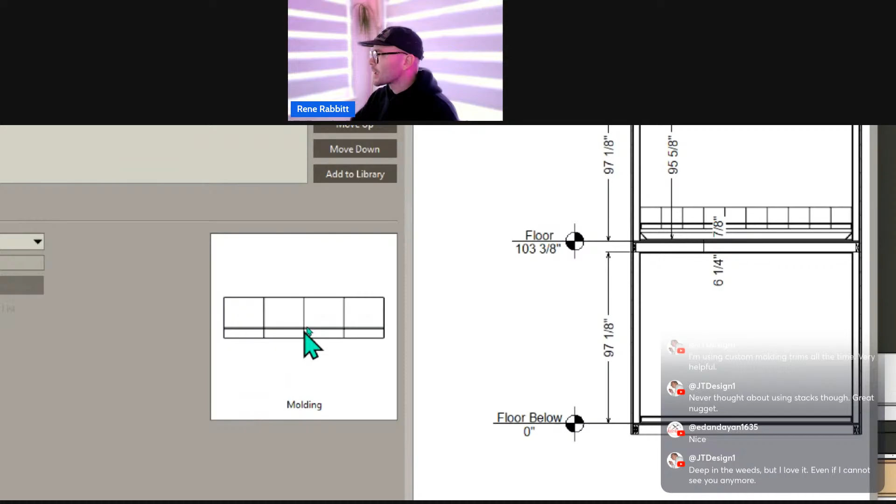So keep that in mind, it's a little bit more difficult to place this, all right? But I do think I get to do something like this where I'm going to say, hey, the height of this is 54 inches. And we notice in the preview, look what it did - it stretched in a way that I didn't want it to. So I'm very curious to see if this whole setup worked or if we did this all for naught.

It looks like that whole setup did not work the way I expected it to. It did, in fact, stretch a part that it should not be stretching based on that stretch plane. Let's see if we can fix it.

All right, so I'm going to get into that library object, open this object. Let me get back to that advanced sizing. I did, in fact, have a stretch zone in the height. It doesn't seem to be doing what it's supposed to be doing. So maybe we did run into that glitch.

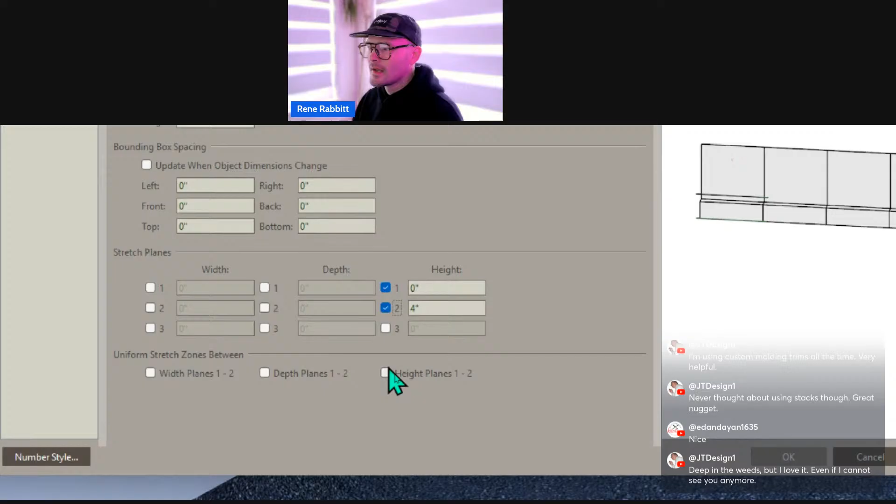Just to double check that, I'm going to create a stretch zone. That means we've got two points that are going to be stretch planes, and in between those two points, I'm going to create a uniform stretch zone between height plane 1 and 2. And so I need this - you can see here in the preview, it's showing us there's our 0-inch, there's our 4-inch. I'm actually going to change this to be between maybe 4 and 12 or something like that. All right, let me say OK. Let me hover over, click, and replace here.

OK, and now let me open the room up and see if I can't stretch this, because otherwise we're going to go yell at Chief, which I love to do. Okay, so overall height, let's make this 36 inches again. What is it going to do?

Ah, it stretches it again. Come on, Chief, you screwed this up. This used to work - this used to work very, very well, and it doesn't seem like it will anymore.

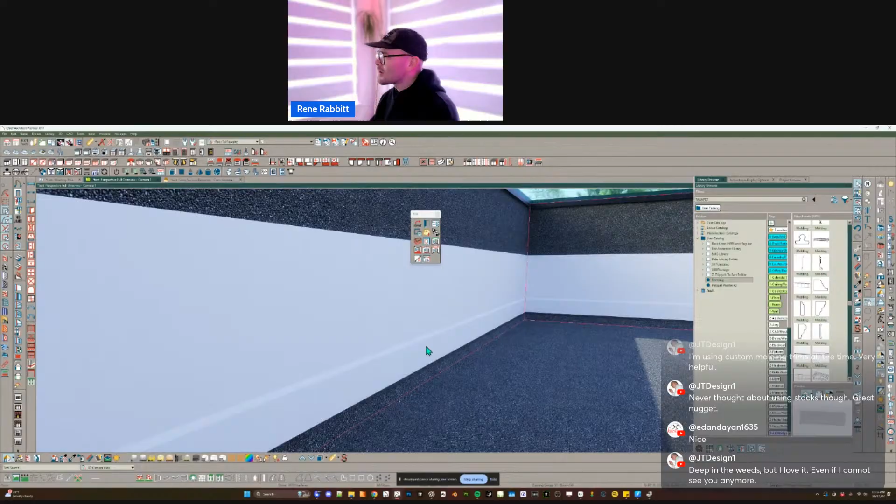Oh, no. Let's just try that 48, just triple check. Yeah, it's definitely stretching that lower section where it shouldn't be. I think it's hard to tell - who's got a good eye? Let me just set this back to 12. Yeah, definitely, I feel like it's definitely stretching. Yeah, too bad. Interesting. Well, it shouldn't be.

I'll bug them one more time. They got to be getting close to X18 beta, so whatever.

Let's see, I see a comment here: deep in the weeds, but I love it even if I cannot see you anymore. Does that mean because I'm so far in the weeds, or you actually can't see my camera? Let me know, all right.

So I think that's about as far as I would take this video. I feel like we covered quite a bit in terms of, like, you should be able to build a parapet room from this.

The last kind of setup for this is if you are someone that's doing these all the time, right? We're doing these all the time. Maybe you might consider making this a tool that's on your toolbars. And then you'll end up with toolbars that look like mine, where it's covered in very unique tools that I've built. So this is how this ends up happening - I build these tools to make my life a lot easier. And then if it turns out I use them enough times because I'm doing such frequencies in projects, that's when I'm going to build a tool, add to my library.

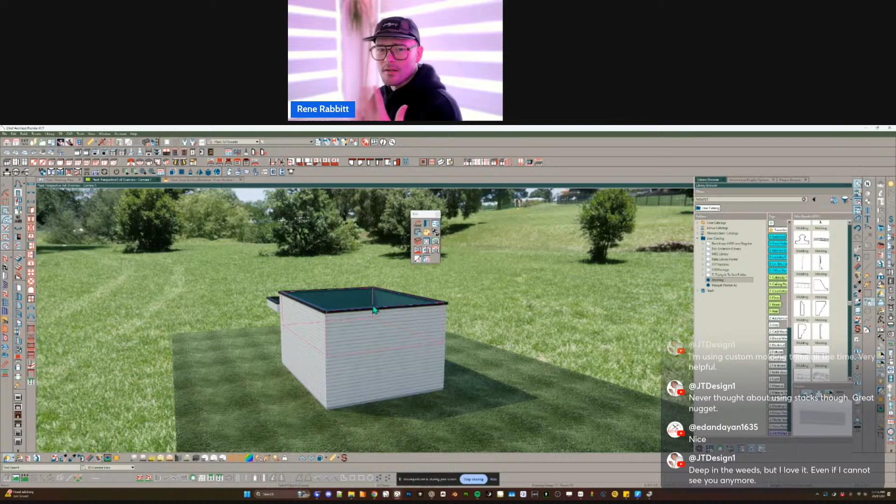And we showed that in the last show, in case you want to go check that out. It's really simple - you customize your toolbars, you place a custom placed library object in your toolbar, and then that ends up looking like this, where it's an unlinked tool in your toolbar, and you can click on it. It will bring up a dialog box where you could then link this to what?

Well, you could link it to that parapet painter that we just created, and press OK. It's going to try to create some automatic icon for you, which is fine. Or you could hit browse to find your own icon and pick something on your machine that you drew. That's me, I draw all my own icons. So let me press OK.

Now we'll notice in my toolbar, there we go, there's my parapet painter. I get to click over this and spray. Simple as that, very cool.

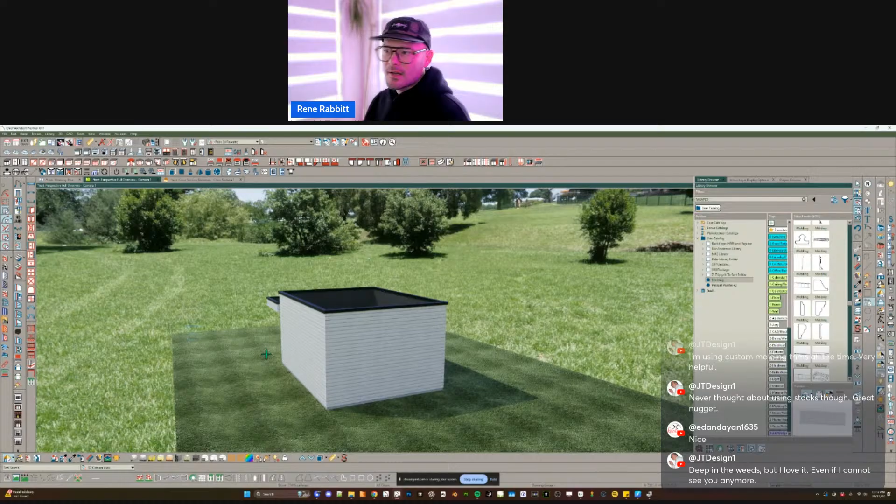I'll show you a couple other ones I have in my system. I've got board and batten, use this all the time, so that's an important one. It's a 3D looking board and batten, uses a couple tricks with materials and transparency and stuff like that. So if we click and move the sun around, you can see that's creating some pretty good shadows.

Another very common one for me, for some of my builders, is they want to add shiplap to things. So this is just a wall material region, saved to my library, then assigned to a custom placed library object on my toolbar. Okay, same thing.

Some shake shingles, those look very 3D. Boy, they look almost too 3D. Those look like some really old shingles.

And then I do one that's, I call this a belly band. Someone else thought that was the funniest name, so it must be a regional name for me. But this would be a belly band for me.

It's just some board. So if you don't want to go through the task, if you're just trying to create one of these on just one side of a building, this is the fastest way to do it, as opposed to messing around with moldings and stuff, especially since we've got these 3D dimensions where I can click in here and say that this is going to be a 2x8. Very, very simple, and then I get to just draw this past.

We talked about this a little bit in the last show as well, because these do miter at the corners as well, so that's really cool.

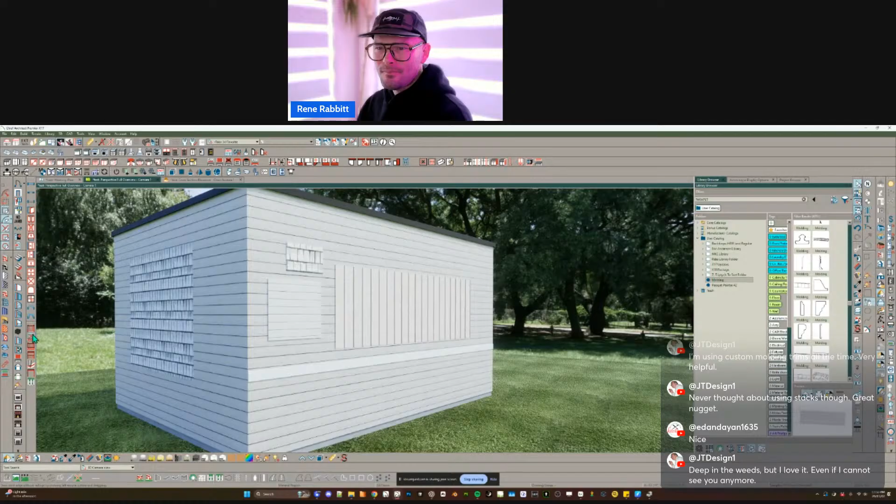And then my last few are just some funny ones that I find to be novel and used very rarely, and probably don't belong on my toolbars. But creating a little bit of a 3D lattice effect, as well as some ivy where I can use some of our new tools to affect this ivy.

In case you didn't know this, we've got those adjust material tools. So just a little tricky getting this selected, isn't it? Yeah, if I wanted to adjust this material, you get to use that interactive material editor tool and then just drag this up to where you need it to be, right? Kind of cool.

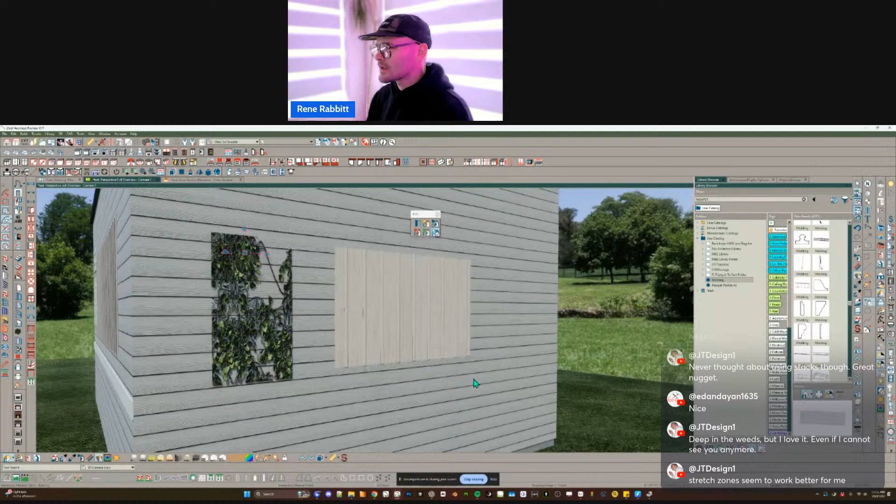All right, all of this coming back to just, hey, let's set up our exteriors so they're as fast as possible. There's some other things we can do with those room style palette tools.

If you didn't know this, my templates do some automatic area analysis. So if I target a room and I go open the schedule from the room, these are a bunch of individual schedules that are worked out to show me area analysis.

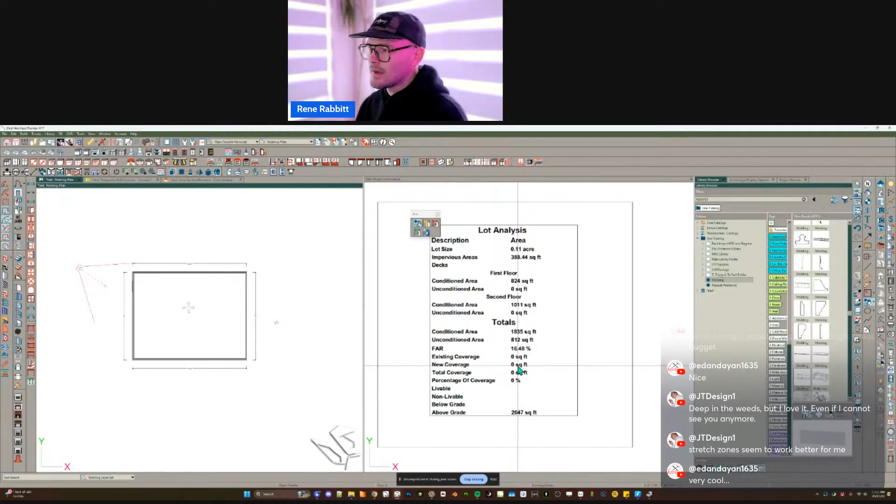So if I kind of tile this side by side, then now that you know that style palette tools can change some information about a room, you'll notice this is if I get down and say, hey, I actually don't want this to be considered part of the coverage in my building. I actually have a style palette tool in my toolbar to say, hey, remove the area analysis from this room. And you see here, it just affected my square footage versus adding it back. You'll see here, it affected my square footage. This is how we can make some really, really simple tools to do calculations for us, right?

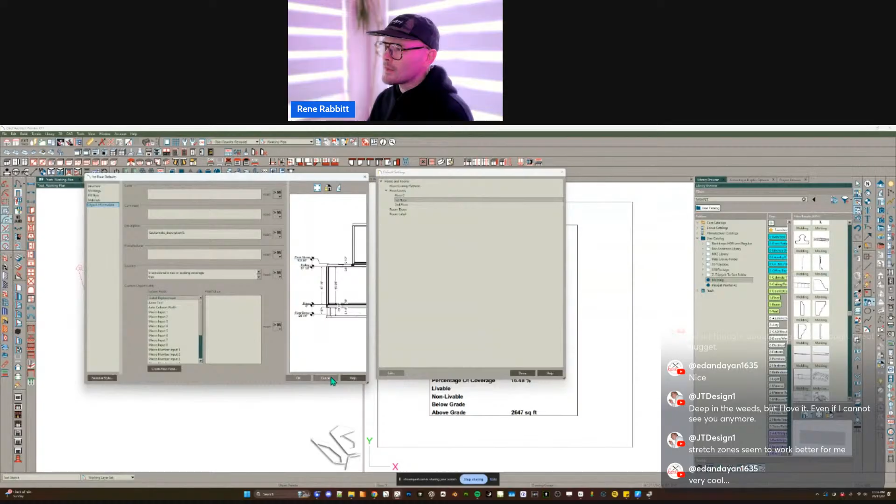So this all started in X16 when we got floor defaults. Your default plan can have some stored, we got reportable object information, so we got an object information panel in our floor defaults. This is where you can set up custom fields to do very custom things for you automatically, such as create an area analysis on the fly, or do any number of reportable things that we might be able to get from a room. This is where we get into that kind of power user level, where we're trying to understand what does a room actually report for Chief Architect.

And you're going to see here that it reports a ton of information, and it's information you can use to create calculators that are sent to schedules. So this is a very long list of things that it's reporting.

So for instance, base moldings. We can see here we've got some kind of a base molding, especially if we were to get to that cantilever level real quick. We go up a level, select that room, and I'm going to get into the object information panel.

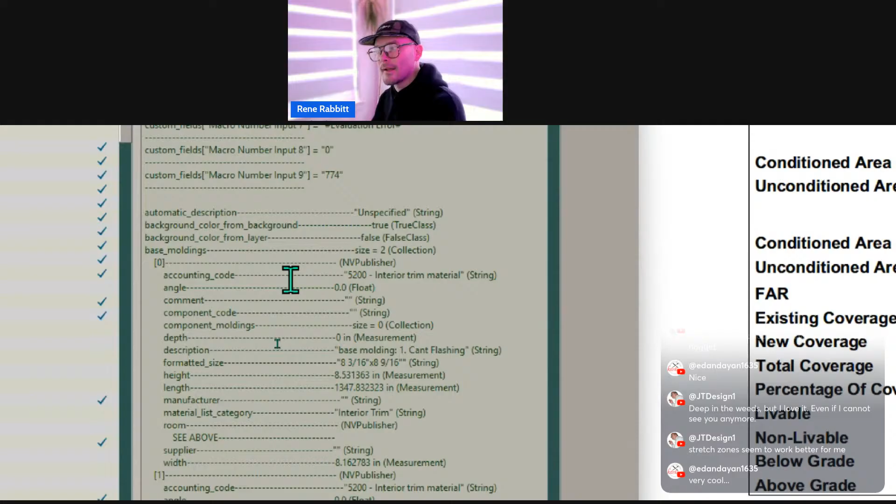This is coming from text macro management. If you didn't know where this is, it's in CAD, text macro management. I have a custom version of this macro, but Chief Architect ships with an object information macro where you can see the expanded macro value, and it will report all the information for that particular object you have selected in plan.

So we can see here now that cant flashing, right? What you might notice is because it's reporting the length of that cant flashing, we could write some condition that said, if there is a cant molding, show me the total linear feet of this in my schedule from a custom object field out of the box. So as soon as I'm drawing, I'm getting a visible display of total length of a molding. If you're always quoting something like cost per linear foot of molding, you could do a macro that says per linear foot of molding it's $2, report this to my schedule, automatically accumulate the total. So as soon as we draw a room without doing anything else, we are seeing a dollar value on how much it costs for moldings, for instance.

How do I utilize this in some other areas? I'll show you real quick. This is just a perfect working example of this. I'm going to just draw a couple of different cabinets here.

Let's change one of these to a garbage pullout. Let's change one to a little sink base. We'll throw in maybe a couple wall cabinets, and maybe a 2-drawer full height cabinet.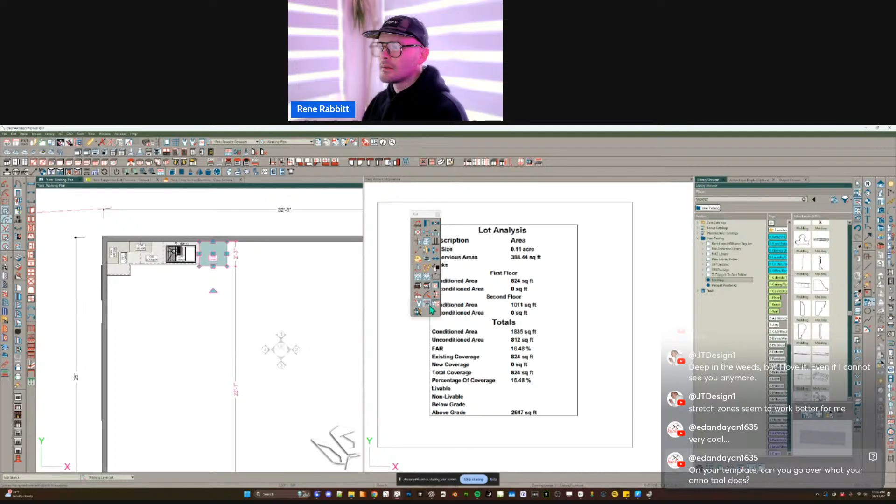And if we go look at my schedule, we can see here out of the box, it's just giving me a custom cabinet price based on a lot of parameters that I set, and it's giving me box volume. So this is getting into the more advanced section of what we can do with schedules and with macros. Let's see, got some comments here.

Stretch zones seem to be working better for you. Ultimately, we want to try to avoid the stretch zones because, for one, they're not needed. Stretch planes will always work if you have it set to the correct cutting plane. Stretch zones just means we're going to uniformly resize in between a particular zone, but keep in mind that can stretch a material if global symbol mapping is unchecked in the material properties. That is me replying to this comment from JT.

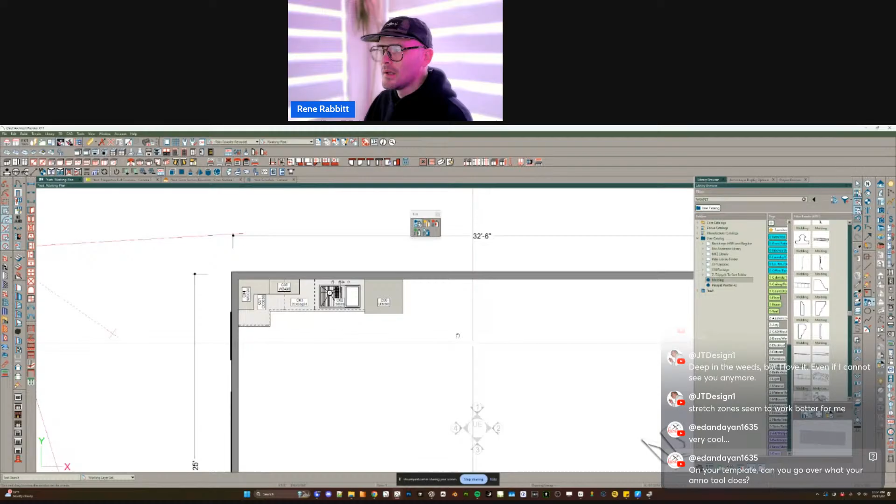What does the Anno tool do? You can rebuild this for yourself. In fact, everything that's in my templates has so many hours in them that you'll notice I don't have any problem sharing some of the secrets of how they work, because if you want to go spend the time to recreate the thousands of hours I put into them, by all means do it. I'll show you exactly how to do it, because you'll learn while you're working on that.

It's very simple. Every object has information being reported from it. So I'm going to bring in a little search tool to show us this is all the information coming from this cabinet. It's a ton of information here, and you can utilize any of it if you do some really basic Ruby scripting.

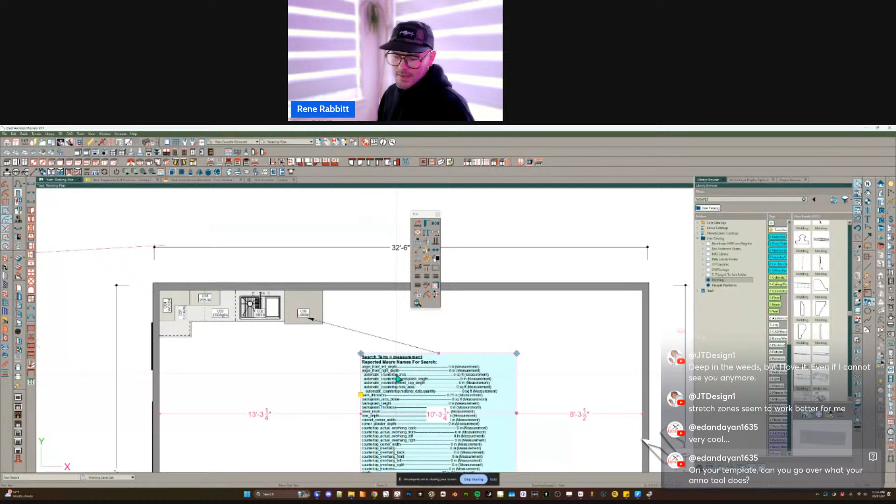Now, there's some caveats there. Chief Architect has some certain parameters that aren't widely available to the wider web, and especially like your ChatGPT. ChatGPT doesn't necessarily understand how Chief's Ruby works. You kind of have to have a little basis of know-how, a bit of some parameters, because very specifically, the first thing I'm going to tell you is that there's a measurement class in Chief Architect.

This does not exist in the wider Ruby world. I believe it would be called measurement class, measurement method, but measurement class, yeah. And this is that it's utilizing the units that are in your preferences, okay? If you did not know this, you could come into preferences, and under the general panel, the subpanel unit conversions, you can create your own unit.

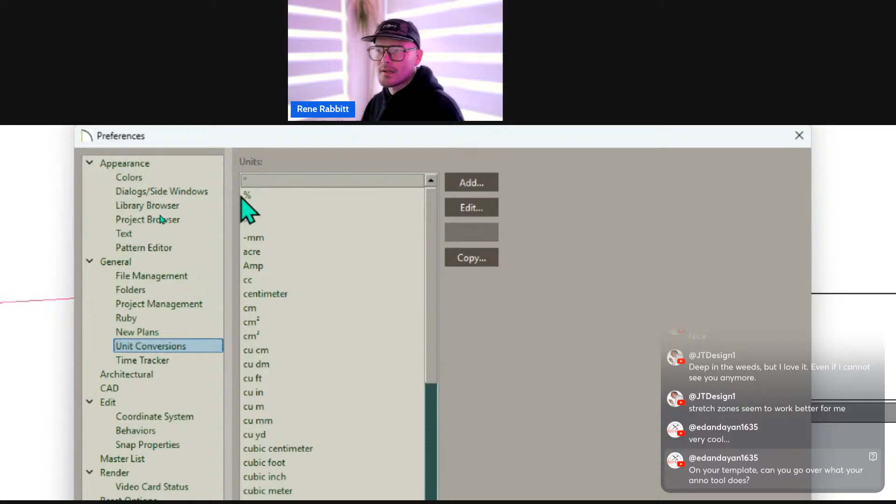You'll notice here that acre is a custom unit that I created. That percentage sign is also a custom unit that I created. Now, when you click on percentage sign, this actually doesn't mean anything. I set it up so that 1% equals 1 foot. That doesn't mean anything. I only needed it to utilize the symbol of the percentage sign.

But there are other custom units here, such as an acre, where I actually did plug in what an acre is. And so the measurement class can say, hey, we know what a foot is, we know what a square foot is, so we can convert that to an acre using special code. This comes straight from your manual in the Ruby section, as it will show you how you can convert from one measurement class to another.

So because of all these reported values, what you could then do is... this is just a text box. This isn't some special object. It's a text box with a macro call that's being referenced, and the reference is coming from this leader line. This is attached. Notice my highlight color there. My highlight is now highlighting that cabinet, so it's attached to this cabinet.

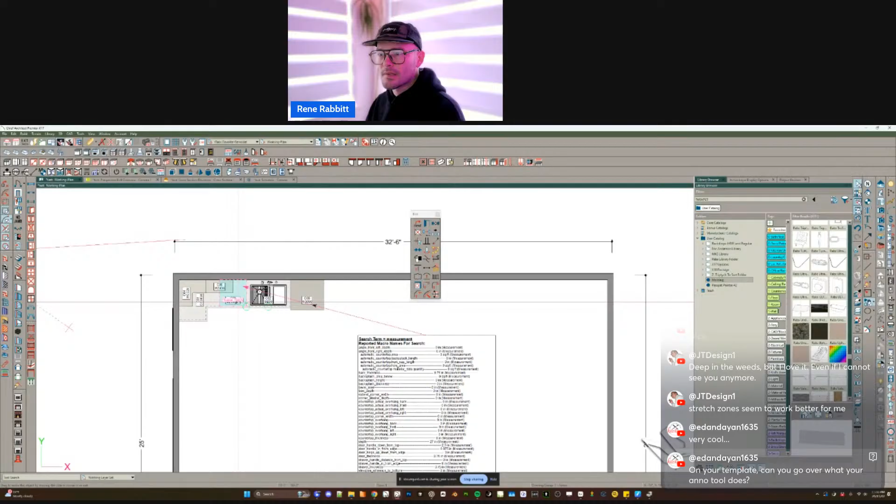So now, because it's attached to this text box, if I don't have it attached, notice it just changed to pick up what's happening in the room because this text box is placed inside of the room. If you were to move this outside of the room, look what happens - there's nothing to report. Now, if I take this leader and connect it back, there we go. It's reporting based on a reference, all right?

So what my annotation tool does is it just has a macro call inside of it. When you place it in a room, it sees that it's a room. It's got some rule sets built into it for this room, okay? Outside of a room, it recognizes it's not attached to anything. It's going to change its reference as well.

Well, sometimes it needs to rebuild and it gets a little glitchy sometimes. There we go. It picks up that this is probably - I'm going to bubble something and say this is an area of work, all right?

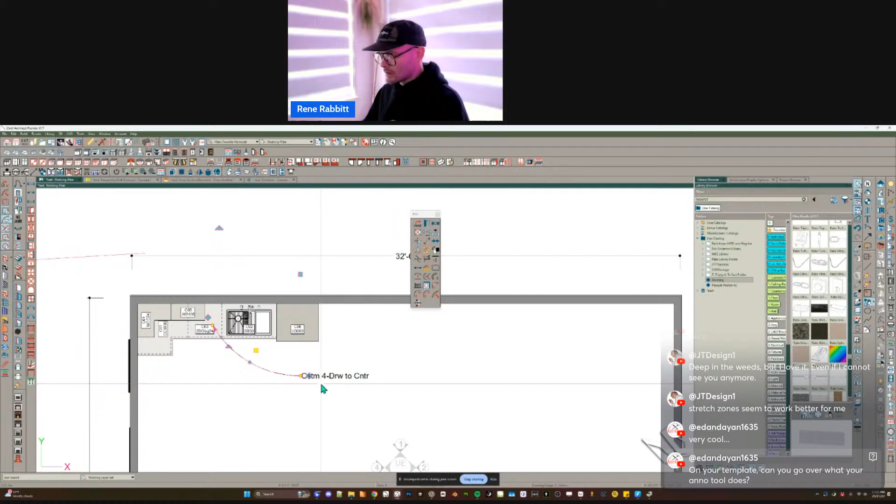Now, if I move this back into the room and I plug this into something like this cabinet, it has some base amount of information built into it. It's going to look at what the type is. Based on what the type is, it might report its automatic label.

But the first thing that it always does, this is just the way I set it up, is that it will always look in the object information panel for the AnnoTool custom field. And if there is something here, it will place this above any of the rule sets that I've created, okay? So you can see here, custom four drawer to center. So if I were to say blah blah blah, okay, you're going to see that update, all right?

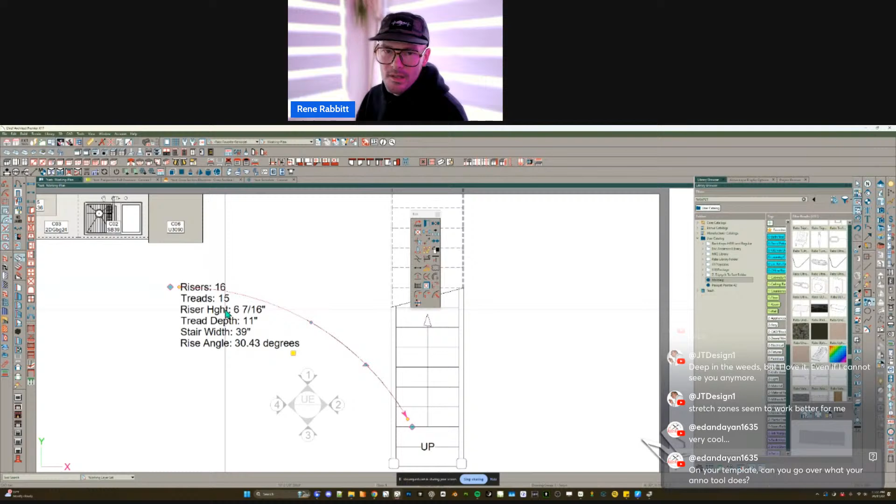That's pretty clever. So it's just based on what it's connected to, so that if I have a staircase here and I click this to the staircase, it's going to pick up a bunch of information about that staircase. That's because that's what I programmed into it. If I get down into a basement level, it's going to pick up what an overhead clearance is. If I pick up a wall, it's going to assume 8-inch concrete stem wall footings.

Here's another clever one - if we were to go in and let's just make this a garage, and let's just throw in a little garage door. I find this information to be interesting, I think, to people. It kind of opens your mind as to what you can do in Chief Architect, because there's a lot of things you can do with macros. A lot of times it's like analysis paralysis - it's like, okay, I get it, we can make macros, but what would I use it for?

Check this out. This is a 9'3" block out for the garage door. It just makes my life easier, and it's also limiting my liability from user input error. I say that all the time. That's the biggest selling point for using macros, is we no longer have that potential for typing in something incorrectly. So it's a pretty cool tool.

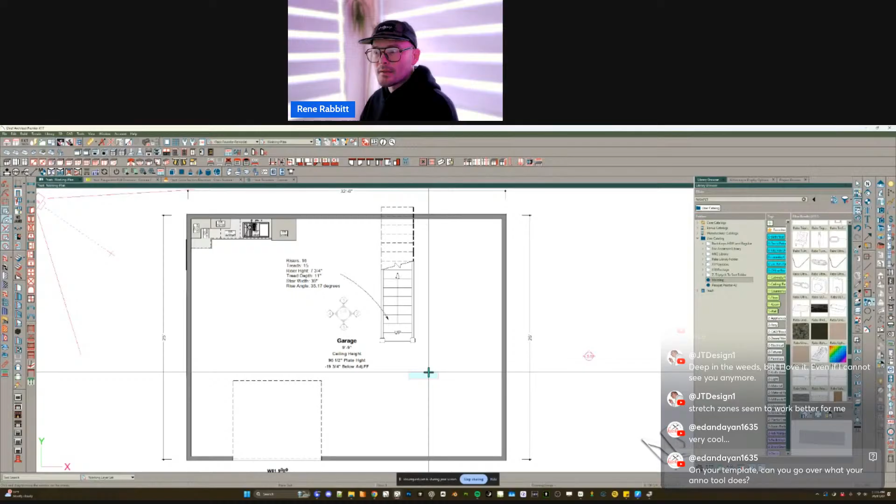So you can just write a script where you've got some text box that's referencing some other object, and it will put whatever text that you want there. Not only that, I want you to notice something here - here's my Anno tool. I'm going to have it connected to this right here, and my kitchen tools are built off of style palettes, which we just created for our room, okay?

Something we could have saved in the style palette for parapet is we could have been reporting something to the object properties. Let's give this a full swing example. I'm going to get back to my parapet painter. I know we're running over time, but I think this is valuable info.

Let's get to this parapet painter. I'm going to open this object, open the object here, object information. Notice that I don't have an AnnoTool custom field. If I am missing a custom field that's in my plan, unfortunately the only way to work around this is... the reason it doesn't have that custom field is because there was no value in that custom field when we created the style palette.

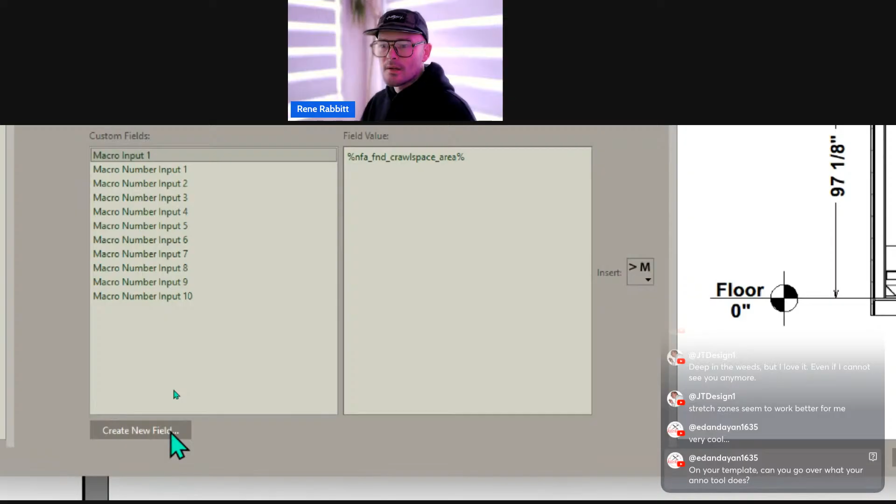So there's two ways you could do this. You could either create a new field and perfectly match the typing, in this case AnnoTool, for that custom field so that it's recognized. Or we could go back to that parapet on that second level, open this up, and AnnoTool has some kind of information.

So, for example, 'example parapet' is what I'm going to put in here. Under the AnnoTool field, I'm going to press OK, and I'm going to hit Add to Object to Style Palette. We talked about this earlier in the show.

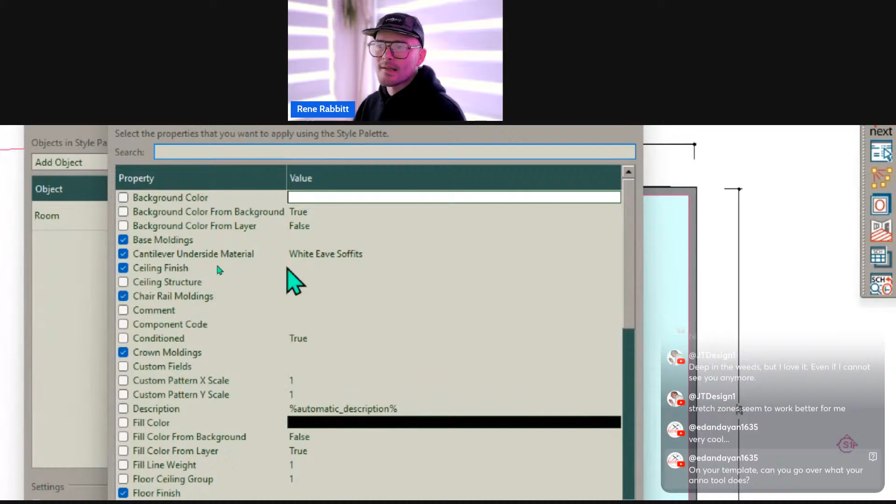This time, I'm going to add to existing. User catalog, there's my parapet painter. It's going to warn me I'm about to replace an item. I'm going to say OK, I intended to replace it. It will have all the same set properties as before. That's good information to know.

This time, I also want to include custom fields because I've got a new setting in custom fields. Keep in mind, you cannot target one custom field separate from others — it's all or nothing. That's really important to note. You can really screw up some systems that you've created, so just keep that in mind.

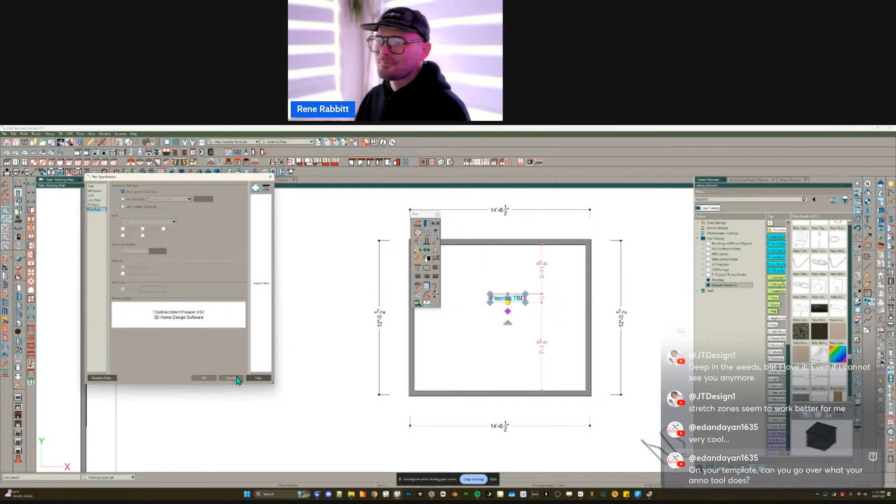Let me press OK. Now, if I were to have the AnnoTool over here in this parapet, you see flooring to be determined, and I use my parapet painter. If I did this correctly, and I didn't, it should have applied that custom field, and we should have seen this change to that rule. It might be that for room objects they actually take precedence over that AnnoTool input. That AnnoTool column should say 'example parapet'.

Looks like I got to go rewrite a code. Thanks a lot.

For instance, here I've got a 2-drawer painter. With my 2-drawer style palette, it does bring forward an AnnoTool change. So when I spray this, we're going to see that it changed this to pots and pans, because that's pretty common for me if I've got a 2-drawer base. Just makes life a lot easier.